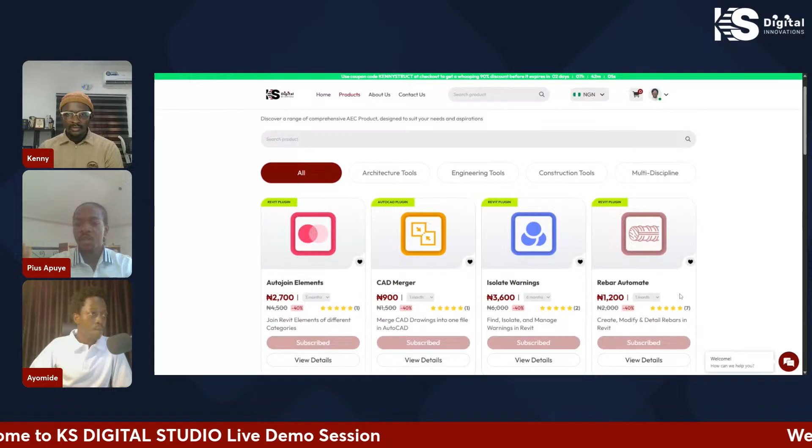Now you can see the 7,200 shows for 6 months. So it's not just subscribe to 6 months. You can change it to biannually, 3 months, 1 month. Let me say you just want to explore the product, so you pay for 1 month. I love that flexibility. Then if I look at the price, I saw that for 6 months, that is 7,200.

On a project that I get, it's going to be less than 5% of the money I can make in 6 months. Far less than 5%, I think. Maybe less than 1%, honestly. It's like biscuit money. So it's one of those things that is going to help me, and I can see the price. It's like you're an artisan and you're getting the right tools to make you better.

So I feel like the prices are, in fact, like I said, if I was on Kenny's team, I'd be like, don't you think we should increase this to like 50,000? Well, I love the prices. Thank you very much.

I must agree as well. I don't want to mention the competitors here, but like what Pius said, the competitors' prices are far higher, and I can understand because they set their prices based on their region. But this is an African-designed product, something that we should really emphasize, and it's been made friendly for all our users. There's been a lot of research in the back, and this is far more affordable.

Imagine you're doing a 4-bedroom structural design and you're collecting maybe 500 or 600,000 naira, and you're just paying this amount. So let's say you're going to be using that for a month, just a 1-month project.

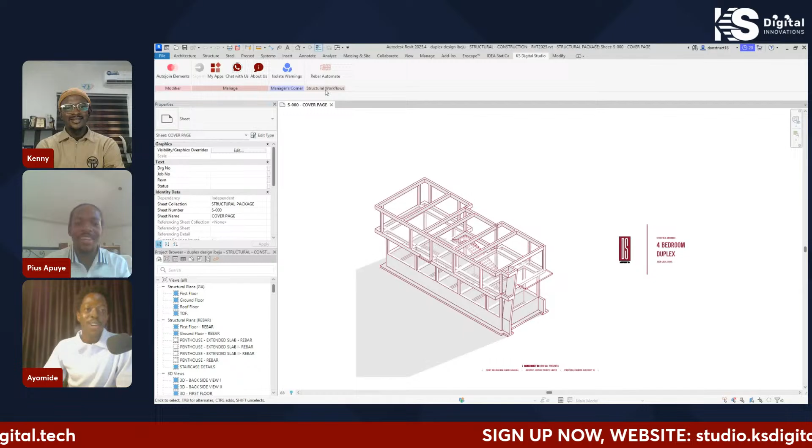So I realized that you can actually rearrange the plugins to how you want to suit them. So under the Manager's Corner, try and click on it and hold it to shift it to another area. Oh wow, that's pretty neat. In fact, let me go ahead and just move the Rebar Automate to the first. Yeah, I like what I'm seeing now. So you can hold your plugins in your own taste. It's an Easter egg I discovered the other day.

I think it comes with Revit. Are you serious? You can arrange how your buttons can be. Yeah, you can check every other Revit tool. It comes with Revit. You see, we learn every day. I'm not going to do that now, but it's something I'm obviously going to do after the stream.

All right. So I'm going to go ahead and open the Rebar Automate tool. So here we have tag rebars, there's rebar visibility, there's modify, and we have the create rebars, which says coming soon. But now let's start from the tag rebars. The first option we can see is hide and tag rebars. If you look at the little icon there on the hide and tag, you see the specific situations where this plugin is most useful: in column elevations, in beam elevation sections, and also for slab detailing. So we're going to test an example using a beam.

So can you open some of your beam projects, your beam view, so that we can test it out? Okay, that's a beam plan or beam elevation? A beam elevation. I like what I'm hearing. Okay, let's see. I'm looking for a beam that we can use for this example. Let me just go ahead and open up, let's say, beam 11. No, this one is too small. Looking for something challenging.

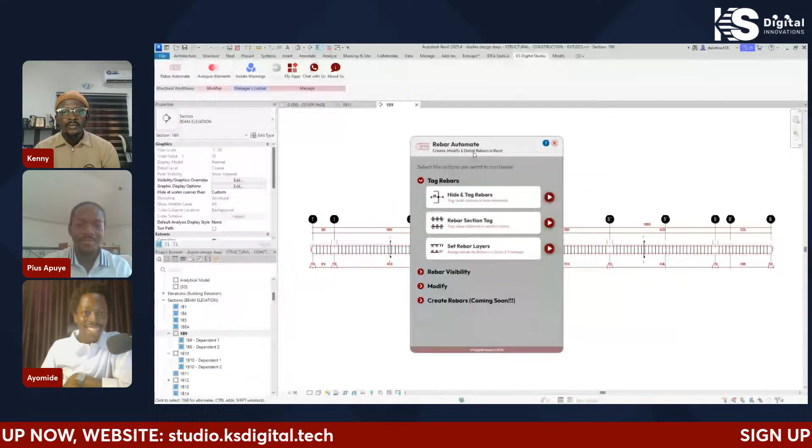Okay, I like this. So we have this in. It's now a very long beam. I think this is okay. Let me see how long is it. Let me go ahead and unspan this because I had to truncate it. Okay, so this is about 19.2 meters in span.

Wow, so what we can do, since we are looking at the hide and tag rebar style of detailing here, you'll see the play option next to the hide and tag rebar. So you click on that button. Now this is what you're greeted with. First you see the option for multi-rebar tag and tag type. The multi-rebar tag is for elements that require multi-rebar tagging, like your links and reinforcements on your slab.

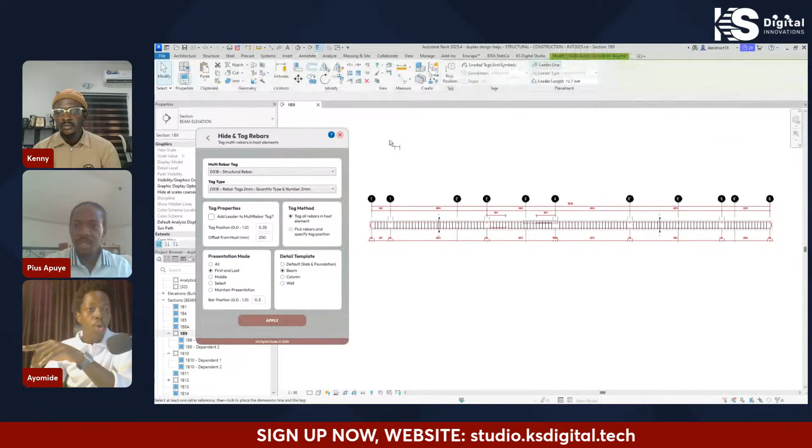Those are multiple, that's where you choose the tag option. You can click on it and choose the normal tag you'd use for links. So that's the same as if I go to annotate and click on the multi-bar here, right? Exactly, see, it's the same options we have here that we have inside there. That's pretty neat.

And for the beams, you use this option next. So what do you use? I use this one here. So the very next one, which says tag type, is...

Oops, sorry about that. I think I had an issue with my Revit. Give me a minute, let me just go ahead and load that up again.

No problem. As I was telling Engineer Kenny while you were out, this plugin literally saved my life this week. I was so anxious trying to finish a project, but I was very calm because I knew I had the KennyStruct Rebar Automate tool that could help me do everything. Is it that deep? I was so confident. When I was testing it before, I said don't worry, this is going to come in clutch for me. I can't wait to show you what has literally almost saved my career this last week. I can't wait to see it as well.

Sorry about that, I had a process going on in the background, so I think that's the reason for the Revit crashing back there. Let me go ahead and do that again.

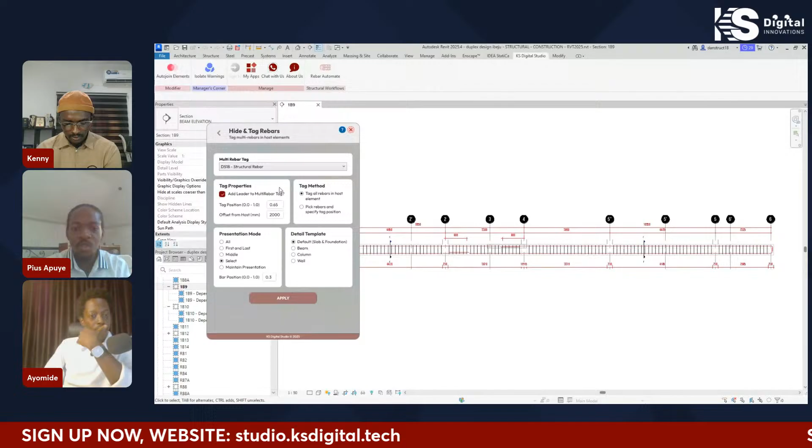Click on the beam because we want to detail a beam. So click on the beam, and here's how that comes up.

So where I stopped was telling you about the tag type. The tag type focuses on the longitudinal bars that are coming - those are your compression and tension bars on the beam. You can see those bars here, the top and the bottom bars. So that's the tag.

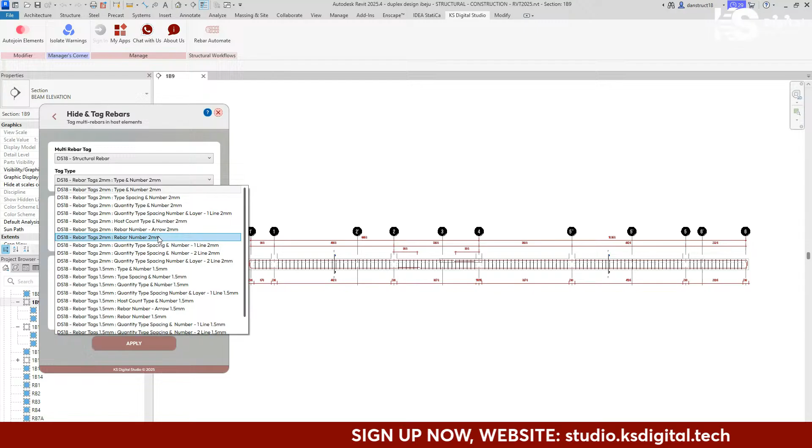So you pick the tag that you normally use. Normally, if you're doing it manually on Revit, you go to the modify and the tag - I think that falls under the annotate tab, tagged by category I believe. I'm so used to using my shortcut that I don't even know - the shortcut TG, right? I created some of mine, but please do pick one that you normally use.

Oh yeah, this is definitely one I'm using because after this stream, I know I'm going to use this. Okay, so let's do that. All right, so what do I do from here?

Various options there. First of all, you see the tag properties, which gives you the option to add leader to the multi-rebar tag. The leader are those little lines, and then you see links detailing the line that's attached to that - when we do it, I'll show you. So you can click that option.

Then secondly, on the right there, we have the tag method. The tag method says you can either tag all rebars in host elements at once, or you can pick specific rebars to tag at once. So let's say you want a more detailed view and want to control it more - that's when you pick that option.

But for now, you notice that it's grayed out because you're not really - yeah, I just noticed that. Yes, so you notice that you're not able to pick it.

But when you're doing it, especially when we get to see how we detail a slab, you see how it comes into play. So now on the bottom left, we have presentation mode, and this is related to the links.

I think it will help show how this works. Yes, we have 'all', which shows everything still there. We have 'first and last', which is the preferred option to display for links. We have the 'middle', which just shows the middle one when you get to select, and then 'maintain presentation' - supposing you've already done it before, it's going to give you that same view that you wanted.

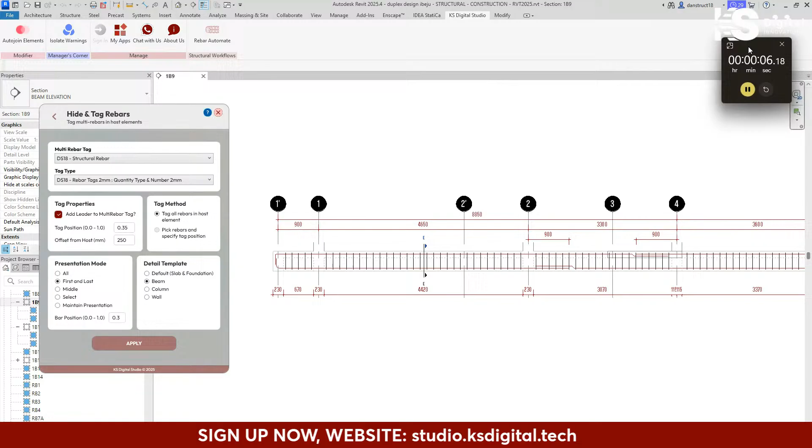Remove that first 10 seconds. Okay, so I'm just going to come here, I'm going to start here. I believe this should be my workflow on a normal day, especially if I'm not about to crash out.

So I just select one, then I type SV to select all the links. I come here, change this to first and last, and insert. All right, and I've already placed all the dimensions here - don't really need to worry about that, so I just go over here.

Let me just close this for now. I'll go over here and I want to tag, so come here to annotate - or let me just use the shortcuts. Okay, so annotate, I come here.

Okay, my fastest version - okay, I'm panicking a bit. All right, so I'm done here, I put this at 7. Okay, I tag this one here, all right, tag this. Okay, there we go.

And probably I want to still tag here at this point a bit, maybe - I don't think there's any need, it's not that long, so this is still the same bar.

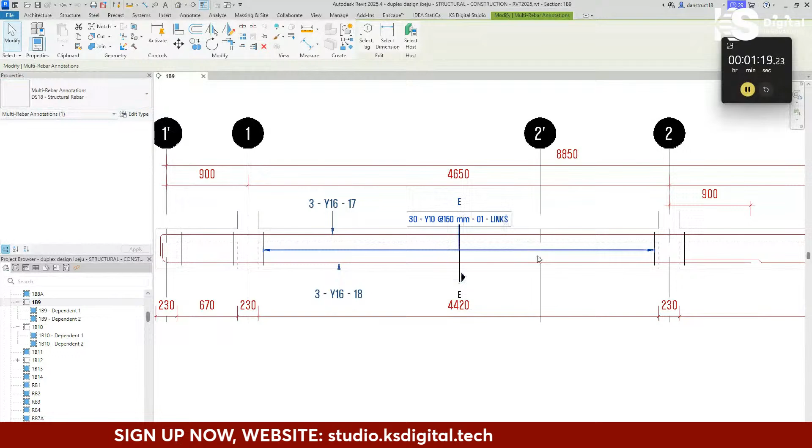Then I want to just go ahead and put the multi-rebar annotation. So let me just come here, tag this - there we go. Oops, all right, oops, not this - I'm just going to change this here to this option here. Okay, all right, great, let me do that again.

Turn off the leader line, I want that centered. Okay, this is giving me a headache. So this little one here, let me select the tag and turn off the leader. This was a mistake, let me center it. I'll type CS, then this one here, MT again.

I'll turn on the leader line because this span is a bit too small. Then I just want to place one. There we go.

So that's 2 minutes on the dot, right? Yes, this is 2 minutes. On a normal day it would be faster. Just to give you background, this engineer is very well experienced with Revit, he actually has courses on Revit, so this is fast for a normal person. It's faster than average and it takes 2 minutes. So there's a difference between telling you it's going to save 80% of your time using this tool.

But now let's show them using the plugin. Let's see how much time it takes.

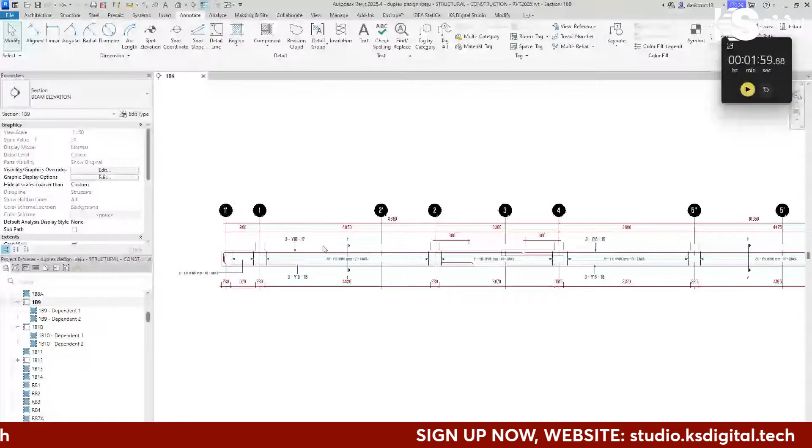Does that mean I have to remove all this? Yes, move everything, go back to your original presentation. Control C, okay. Let me quickly remove that. Or you can just simply undo, use the undo button. That makes it faster. No, you already put the first and last, but okay, no problem. The links, all of them are showing. Okay, I could just quickly change everything back to the normal presentation. Exactly, okay great, yeah that's right. I should have just on.

So I go ahead and do what now? Yes, okay, now please start the timer first. You see the timer on the screen, click on it. Okay, yeah. So when you set everything, you click on apply at the bottom. Apply. So you would see it select beam host, it selects the beam. Okay, the physical elements, right? Yes.

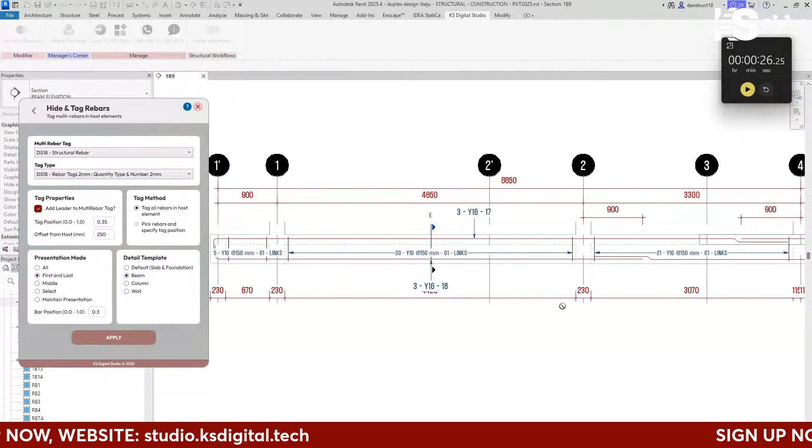That's okay, wait, hold on. I was explaining, so that's going to take some time. Let's say approximately 10 seconds, if you already know the whole process. Because I'm showing him this for the first time, so I have to explain. But imagine you're using this, so this is about 15 seconds versus 2 minutes. That doesn't matter at this scale, but imagine you're trying to detail up to 56 beams.

You mean what I just did now? Yeah, I knew it was fast. Okay, this is interesting, yes it's mind blowing, right? Exactly, so it's a different case where I tell you it saves 80% of the time, now you're seeing the best of the best doing it under 2 minutes. It might take you even longer, and then see how much time.

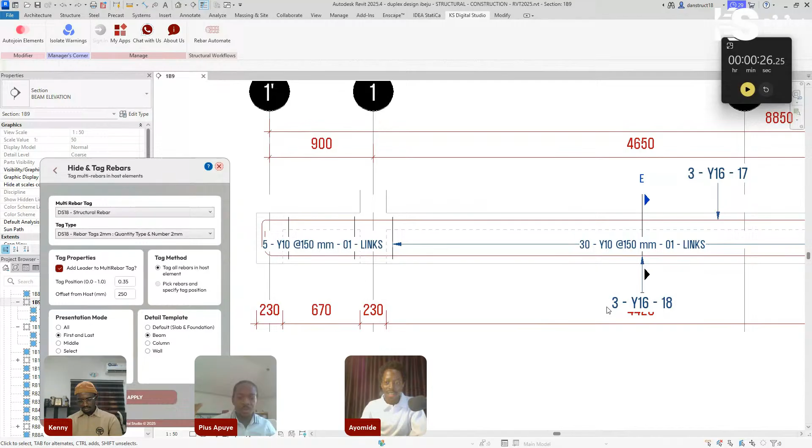That is 15 seconds. When you put it, wait, all of these are tags? Wow, yes, wow. Wait, hold on, let me try something here. Wow, wow, even though they are actually tagged. So even while using this, imagine you're doing it on a large project where you have like over 50 beams. 2 minutes versus 15 seconds will not matter to you now, but when you put compounding figures, that's when you know you save time.

So the only little adjustment we had to do here was the last one, I just did that. Yeah, that saves a lot of time. Actually, yes, oh my god, I wish I could pay for this again.

I'll be very honest, right? I used Kennystructs before this came out, the Rebar Automate, and it worked very fast. Well, this year with the whole redesign, it just makes everything like as if you are using a Dynamo script, especially for those of us used to using Dynamo. That's the idea.

Wait, this was okay, let's cut that, the time it took me to understand. So this was about 30 seconds, remove 5 seconds, like ah okay.

You know what, let's try something here. I do hope the stream doesn't time out. Let me see, I think I have some. Okay, no foundation beams, let me use some suspended beams here. Oh my god!

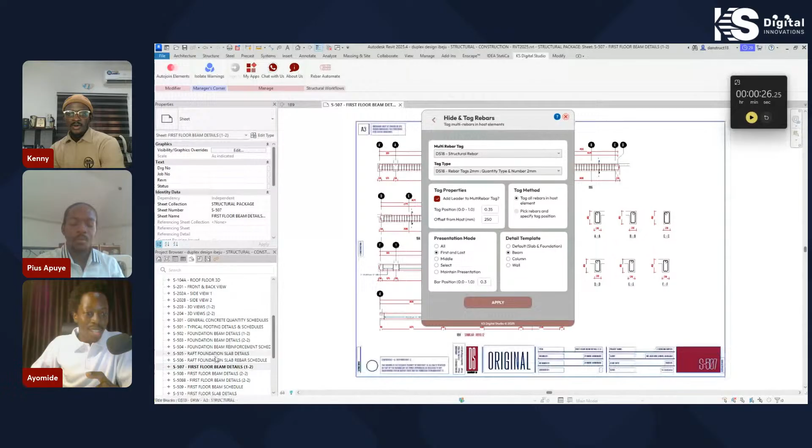These are the kind of tools that you use. I hope you're going to try. I think you should also try this slab. I think that will also blow your mind. I hope you're going to do the slab, right? Yes. Okay, I'm going to try it in this slab. I'm going to stream this now. Yeah, I want to try it here.

So I have this view here, right? I have the tags. I just want to quickly do this. So these are already placed on sheet. So you mean I just have to activate the sheet here? Just come and click on apply, click on the beam, right? Okay. Yes. Wow. So you mean for truncated beams, it carries over to the next.

Oh, God, take my money. Take my money. Are you serious? Because wow. Yes. So it happens here. Oh, this is neat. Exactly. So I can just come back here, click on apply, do the same thing here. Wow. So it's just a matter of, in case some things are clashing, you just modify. Yes. Exactly.

Sorry, Ijidayo, I noticed something on the first beam. The first beam that you did, yes. So you can see that you actually did it, but we have to investigate why it did not work. Like you can see the rebars at this side, it tagged the links, it tagged the other side, but let's also figure out why it did not work.

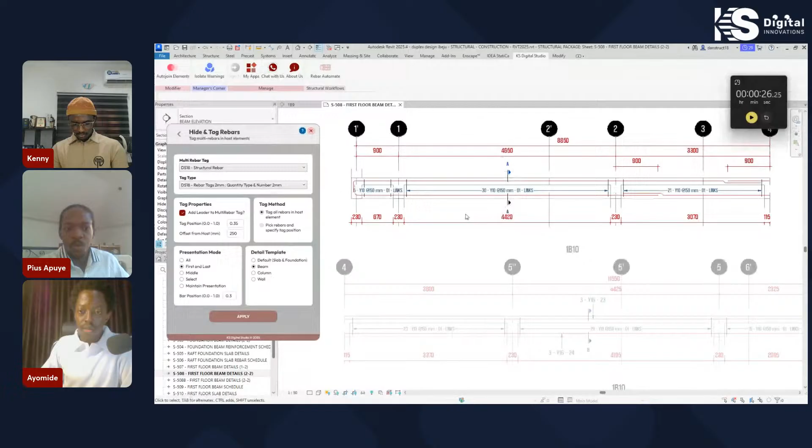Okay, I think I know why this is here. I think it's probably the way I set up the view. So let me try and click on apply again and try to do this. I think it's the way I set up the view because sometimes the annotation crop tends to remove it or place it out of the view. So I could just easily do this manually. It doesn't take me too much time, but I think it's the way I set it up actually.

Let me just go ahead and set this line. Sorry, I'm not detailing. I almost got carried away. Oh wow. You mean I'm done? I'm just done with this beam elevation. So in less than... okay. I think I'm getting too excited. Let's carry on.

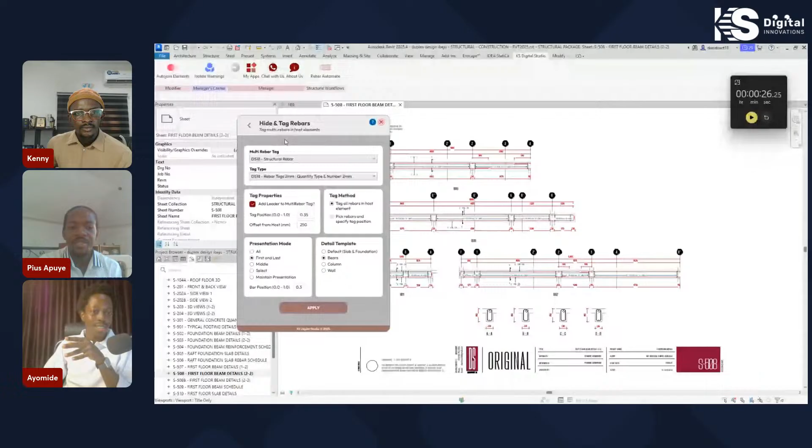Okay, so these are for beams, right? What else can you use hide and tag rebars for? I think you said you can use it for slabs. Yes, slabs, and also slab foundation rebars, like on raft foundations that are literally slabs. So let's try that. Okay, so I have this here. I think I set up some tags initially. So I've already done the presentation here. I was just tagging some of them in place.

Okay, so you mean this same tool we can use as well for slab rebars, right? Yes. So I'm guessing I change this here to default slab foundation, right? Yes. So you can now see, first thing is that the tag type that you noticed on the beam is no longer there, because for slab detailing on Revit, the best way is going to be the multi-rebar tag. That's why the tag type disappears.

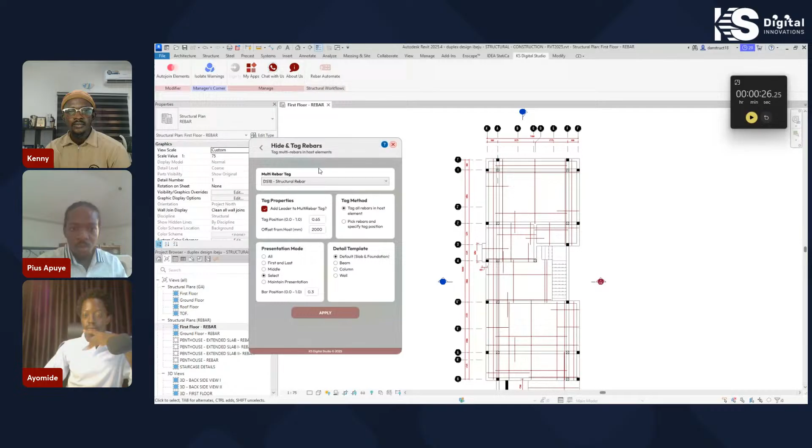Then you can also see tag properties. You can add leader to multi-rebar tag, which is very important for slab detailing. Then you can also pick the position there and adjust it. Then, very important, the tag method. Last time that we looked at it, the pick rebars and specify tag position was not available because it was a beam elevation view. But now you can see it's available. But let's see tag all rebars in host first, then we'll see how the second option works.

So under presentation mode, for this case scenario that you've already chosen the rebars and presented them, you can now use the option maintain presentation. Okay. Yes, on presentation mode. Then on detail templates, since we are detailing a slab, we choose the default, which is slab and foundation.

So click on that and make sure that the multi-rebar tag that you're using is the one you intend to use. So is your DS18 structural the multi-rebar, okay. Here. Yes. I think for slabs I use this then. All right. Okay, thank you. Okay. So you click on apply. Okay. So it prompts you to now select the slab, right?

I think I saw it. Okay. I also noticed as well, it shows you on the status bar at the bottom here, which is quite neat, just like how most Revit tools work. Okay. Yes. All right. So at the bottom then. Okay, so I just click on. Okay.

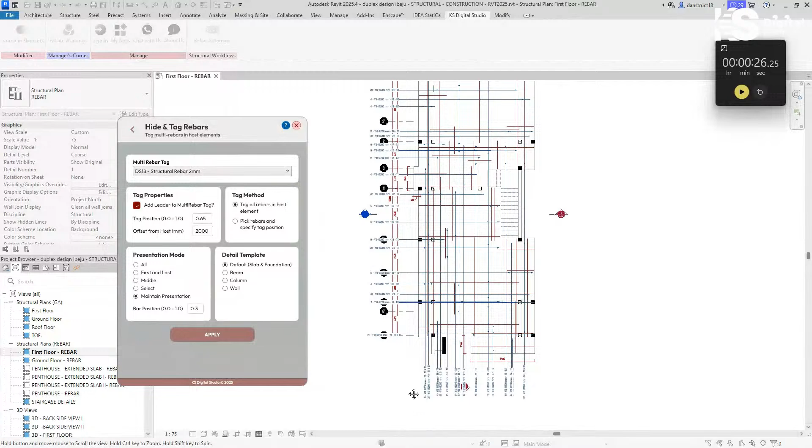Wow. So first of all, I don't even want us to test detailing on slab like this, because if we are going to see this 56 minutes, it's going to be another 56 minutes. Yeah. So, no, this is wow. Okay. Yeah, this is nice. But I think this automatically details to the left and to the right.

So if I wanted to, you can see these are where my dimensions are. So let me try and do something here. I'll just select the tags and I can just move them here to the side, right? I think that should be okay. Yeah, that works. Okay, this is interesting. And it didn't change my presentation, did it? No, it didn't. Okay, so if those ones are clashing, I can just easily move them. I'm done. I'm actually done.

But that laugh sounds so evil. Okay. So it's just, yes.

Okay. So now, because I noticed that you had to manually adjust it to the right side, that's where the second tag method comes into play. So I want you to undo everything and let's see how the tag method works for the second one. Let me just, I think I did a lot. So what am I doing here? Am I changing presentation mode? Okay, so you're still maintaining presentation because you still want this presentation. The only thing I want to change here is the pick rebar and specified tag position. That's under tag method. Okay, yeah, all right.

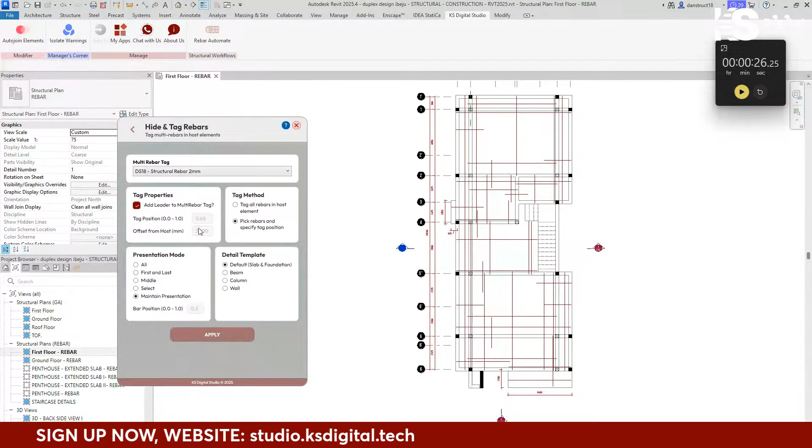I see these options are now grayed out here. Yes, exactly. So you click on apply. And then it prompts you to now select the rebars. So if you see on the right, that status bar will show you select rebars. Okay, so you're not selecting the slab now, you're selecting the rebars. Yes. So let's try that. So select specific rebars you'd like to tag. Okay, I can select multiple rebars at the same time, right? Yes. So this one is more precise.

So just select some of the rebars. And then you can drag and select. Yeah, that's true. You can actually do that too. Oh yeah, I can make a selection. Okay, but I think I'm familiar with this. If I click on that, it will remove the current selection. So I think one has to be careful with that. Okay, I think I can hold down control. I forgot it's Revit. Okay. So I just click on finish, right?

Will it just tag? No, what it does is prompt you for the direction you want to place those particular rebars at. So you can see that line. Okay. So you mean that it won't go automatically to the left and the bottom now? So if I want to do it to the right, like this. Yes. So you just pick it outside and click. Okay, set desired tag location. I think I'm seeing that. Yes. So now it does display.

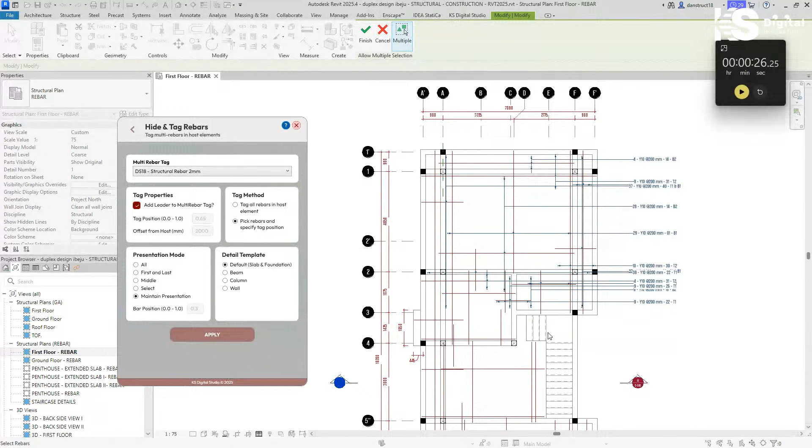Okay. Exactly. So I think I know where this can be useful. Do I need to click finish? Yeah, I don't think you need to. You can just continue that way till you finish tagging. Okay, yeah, so I can just make another selection like this.

Wait, what do you call it? Our private audience, are they here? Are they seeing what I'm seeing? Because I feel like they have some comments here. Wow. You know, hold on. I want to use this stream to do some of my projects.

So when I'm done, I just click on cancel, right? Yes. Cancel. Okay.

Hold on. I have a project like that. Give me a minute, I feel this is going to be very useful, especially where you have complex slab systems. Let me try to open it up. Is our private audience there? I just want to get a feel. I can't be the only one being surprised by all of this right now. Wow. Okay. Let me try and open up one here.

This is interesting. Let's say for this particular slab that we're seeing right now, it would take me probably an hour plus. Let's be honest, maybe an hour, 10 minutes, right? To actually complete the tagging, trying to align everything. It is not something I enjoy doing. Okay, let me go ahead.

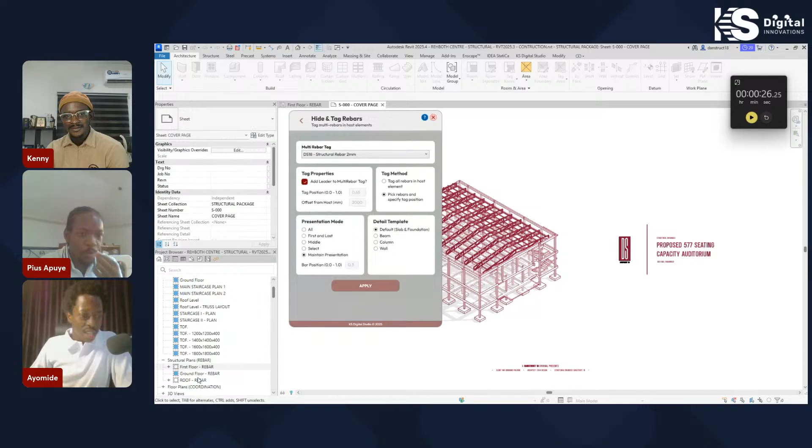So a good rule of thumb that I discovered while I was doing this is before you start, in case you're using the pick rebar and specified tag position, if you want to be more precise so that you don't miss any of the rebars since you're using this tool, what I do as a structural engineer is I do panel by panel. So take it panel by panel so you do not miss any detail. Oh, I see.

So another trick to add to what you just said: once you are done panel by panel, in case you feel like you might have missed something, you can just select the entire rebars and tag. It only picks the ones that are not tagged. Okay, exactly. Let me see.

Yeah, because you can see there's a void inside here. Yes, this is what I want. So that means the ones on the side here, I can just come here and make a selection over them like this, right? That's correct. And then I click on finish. You don't need to click on apply multiple times. Just keep repeating until you are done. Oh, nice. So I can just come here.

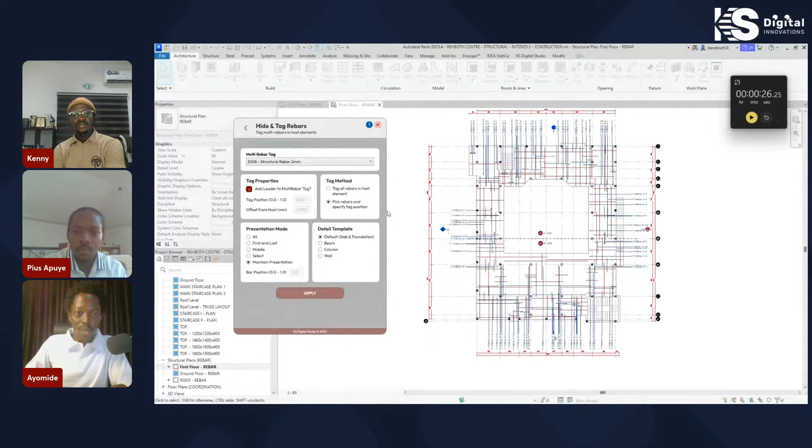Okay, awesome. So if I missed any, I can just use this option. I just make a selection over everything, right? Yes. And then I click on finish. I think you click on apply this time. Okay. Hold on.

Your option for the pick rebars was still turned on. That's why that happened. Oh, okay. You did an undo. Yes. Select everything, all of them. Okay, so the ones that were not tagged are now tagged. So everything now is covered.

So now it's just to adjust the tags. I think from Revit 2024, there's an option where you can just select the tag and then you can align them to a specific position. Then you have this option here to select the tag, align tag, then you can align them to the left or to the right. Oh, that works. That was pretty neat. Awesome.

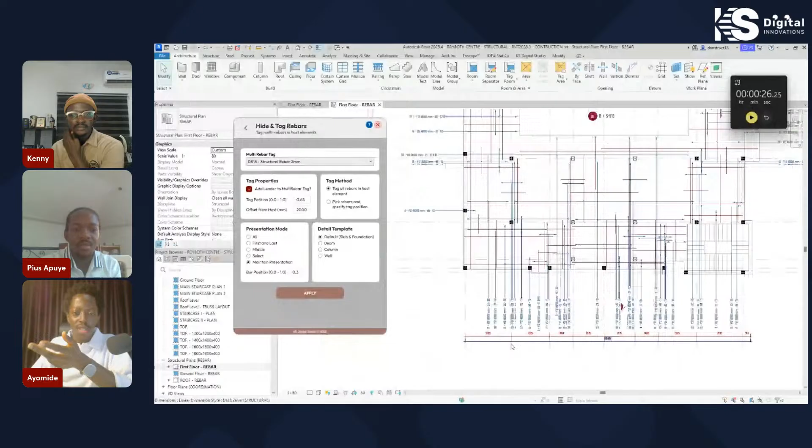So this is just going to take you spacing them out. It's going to take you everything under like 5 minutes max. This thing was going to take you an hour. From one hour to 5 minutes, I promise you. That's how many percent time saving? Almost 90%. These are the kind of projects where you tell the clients give me a week, right? And then you finish in 2 days and just go and relax, party.

Actually, I see. Yes, wow. Thank you, this is not an exaggeration. Okay, so let's also move on.

Let's check the second tool there. But I wanted to show you something that some of the users might encounter, which is related to your rebars not being in the particular host. So I wanted to show you through a beam view. The first thing you might encounter if you don't see a tag is the so-called annotation crop view. If it's outside the annotation crop view, the tag is not going to show. The second thing I noticed is that if the rebar is not specified to that host, that's when you see it.

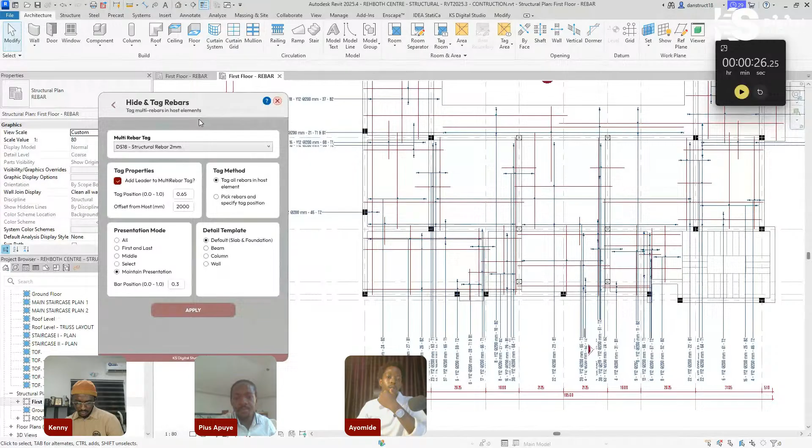Okay, that makes sense. Let me try, I think I can do that here. Let me just go ahead, because I have not finished this, I'm certain I should have some. So I wanted to show them this because it's very important when rebars are placed outside the host, right? I'm looking for a beam we can use. All right, let's use this beam here then.

So we have a comment here, very funny comment. If this tool includes a function to automatically create the bending schedules, I will name my children after the founders. Very funny. Looks like you're going to name them very soon. I think you just have to start picking.

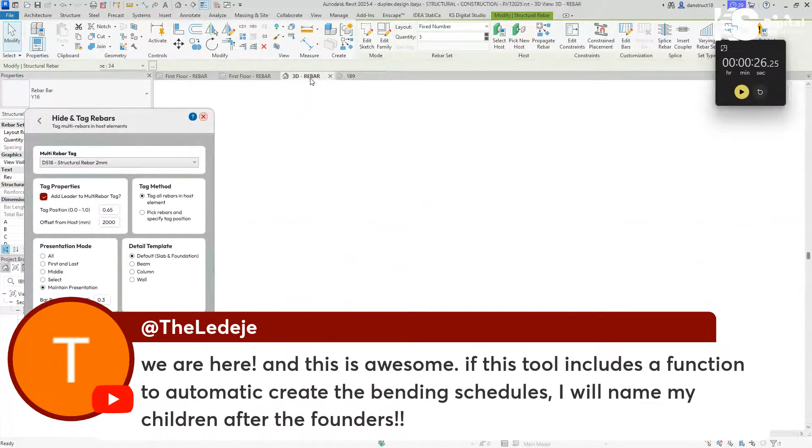Maybe you just have to reach out to us and get our names, because we are going to be launching this very soon. We have a tool that does bending schedules, and schedules for rebars, concrete, and formwork, all in one tool. It's coming out very soon, so please get yourself ready.

Lady J, I don't know how to pronounce your name, but you can see your comment on the screen. Thank you very much. All right.

So I wanted to also show them. I have this particular rebar here, right? It's meant to be hosted in this beam, and these are some issues you normally encounter during modeling in Revit. It is meant to be in this beam, but if I click on select host, you can see it's inside this column. So let me try that again. I change it to beam template. I also notice it keeps your previous settings. That's nice, I don't have to always go back here.

So let me try this. I can click apply again. It won't remove or add extra ones to the ones that are already tagged, right? Exactly, which is so good about the tool. So click on it again. Okay, I see what you're saying. It's not tagging this rebar here. Yes, that's an issue you can encounter. So let me now put it back inside here. All right, if I click on apply now, oh, I see.

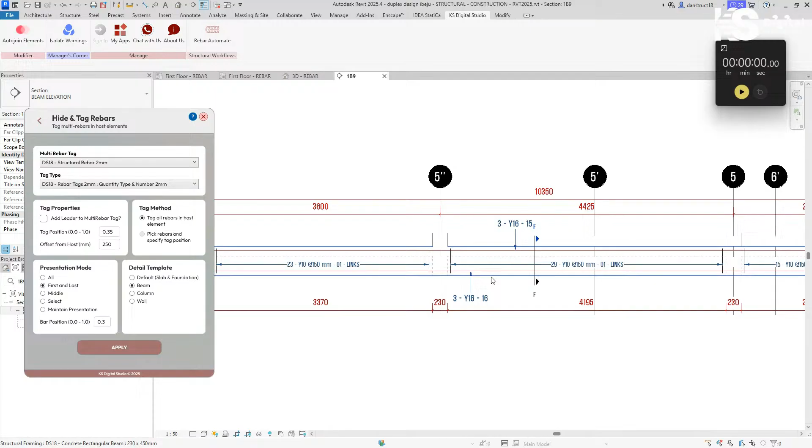So two things to note. The rebar has to be hosted inside the elements that you are selecting for it to work. Oh, I see. Interesting. So in case you're using the plugin and you encounter that issue, the first two things you should check: is your annotation crop view too small so that your tags cannot show? And secondly, confirm whether the rebar you're modeling is placed inside the host. It's also good modeling practice that if a rebar is inside a beam, the host shows the beam, not the column as we saw.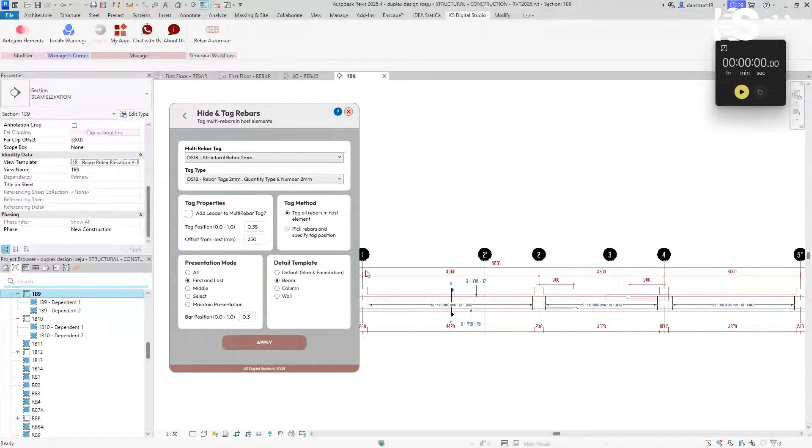And the second thing I wanted to note, you notice that it doesn't disturb the other tags you've already done. Let me see to the right of the beam. Yes, you can see you made your little change there. You anchored your last multi-rebar tag to the left, so it doesn't change it, which is very good. So you're not scared that it's double tagging, even for your slab rebars, and you have to go cross-checking. Something our users can also see. Great. I believe anybody that uses Revit day in, day out would appreciate these small and thoughtful details.

So I'm thinking right now, do we have something for this? I would like to say this is one of my worst things to do within Revit, and that is doing rebar section details. I don't know if anybody can relate with me doing rebar section details. We all can relate. Now let's go back, because for this project, since the majority of the beams are similar, I have about 24 to 26 in total. But for some projects you can have up to 100, 250. It's not anything to smile about.

So do I use the same tool here? No. Like we said, I want to go back to the main option. You see the arrow in front of the hide and tag rebars on the plugin, at the top. The arrow takes you back to the main menu here. So for this view now, you can see rebar section tags. That's what we're going to use, and you can see from the little icon that this is the template that's going to be required for sections of beams.

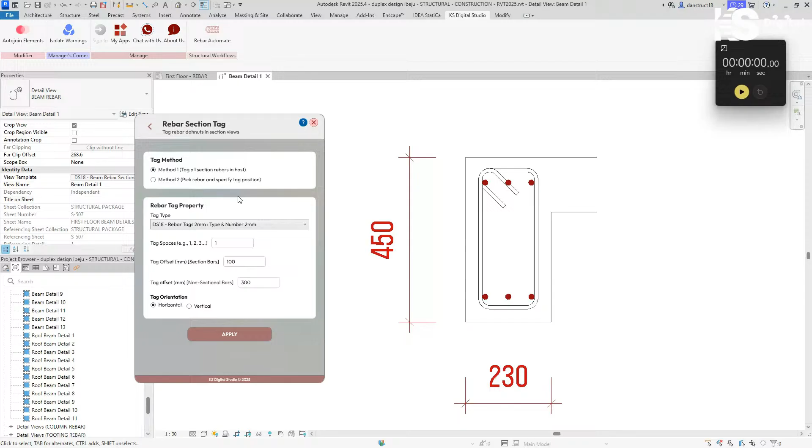The next thing you can see is the rebar tag property. Same thing, you're greeted with tag type. So you choose the tag type you normally use for your section beams. Let me quickly check something. For this longitudinal rebar here, I think the rebar number is 07. I like to show rebar numbers in sections so they can always reference it in the bending schedules. I like this as well. It shows you the family and the types, because I can have multiple families with the same type name. So this is very descriptive. I want to just use rebar 1.5. This should work here.

So when we see tag spaces, when we go to the slab section it's going to explain better. But for now, you leave it at one. What it normally does is skip the rebar next to it. If you say one, it's not going to skip any. But if you say two, it will skip the rebar next to it, then tag the other one. Seeing is better than explaining this thing. When we go to the slab section, that will be more descriptive.

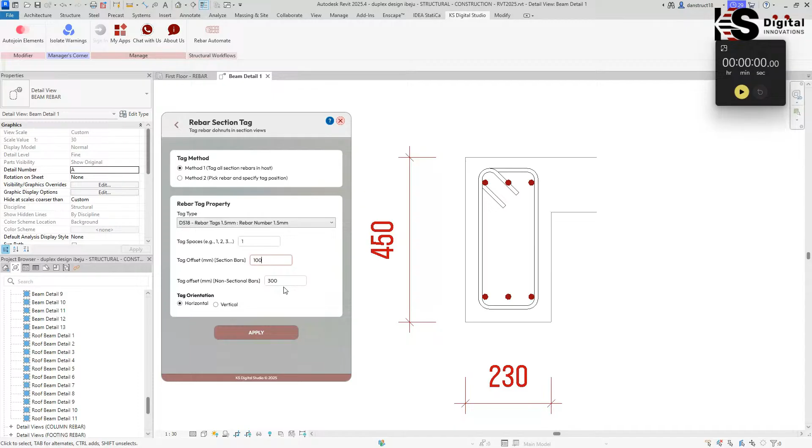Then the tag offset for section bars: you can adjust the length for the section bars, and then there's also the tag offset for the non-section bars. The tag orientation we're going to use here is horizontal because of our view. And once you're done with all your settings, you click on apply.

Okay, so let me understand. This tag offset for section bars, I'm assuming it's for these bars that are cutting through the section, right? Yes. Then the non-sectional ones are for these ones like this, in plain, right? Yes. Okay, I see. So tag orientation horizontal. I think I understand this. So I just click on apply, right? Okay, select rebar host. I see the status here. Wow. Okay.

That was fast, hear what I just did. I do hope we're not spending so much time, because I want to show you how I would ideally do it in real life.

So I'll just come here, select, then change it to the type I want. Try it as if this is the first time I'm doing it. Then I just select it, come here again, and copy quickly. This is why I hate this.

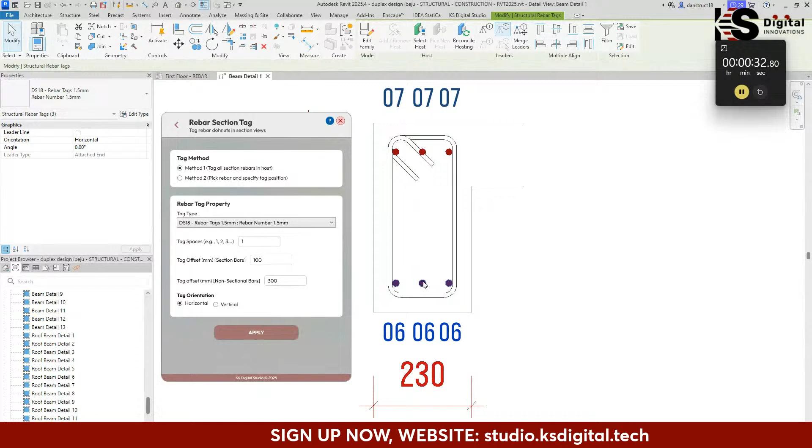It's a strong word, but I know the reason why. If you are lucky, you can sometimes mirror it to the bottom and hope it took that tag. Ah, God, I don't like this at all. Okay, this is 06, so it got it right. So then I come here, okay, let me just quickly try this. That took me exactly 32 seconds. If I'm in the mood, I can be breaking records, like 20 seconds or so. Let's see now.

I want to compare how much time it took with the plugin. I suggest you also use the tag offset for the sectional bars, maybe 50, usually based on the view scale, but let's change it to 50.

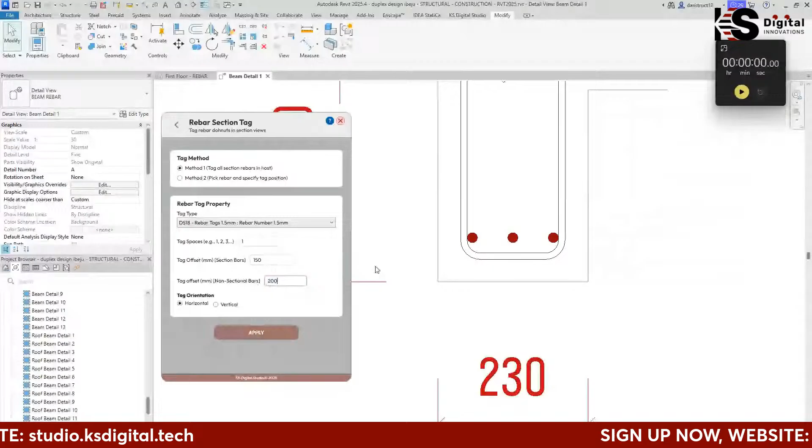Okay, let me bring in the reference cards with it. So you mean the distance like this, right? From the... okay, so let's say I would use about 150 for the offset from the hosts. Let me try this, no, 200. Make it 50. It's the offset from the hosts, not from the bar.

That's from the beam. Okay, from the beam. Oh okay, I see, okay. 50, then let me say...

Let me just demonstrate. So that's the distance from this point here, right? Correct, and then the same distance as well. These small details are very important, right for us detailers, since we want to have this consistent look in the project.

All right, let me try that again. Oh, I see, I see, so it reduces the gap and space. Okay, let me just do that again. Let me just try maybe 20. Okay, so it gets it closer.

Oh I see, so it's also dependent on scale, just like you mentioned. So 50 works, I use 1 to 30. Okay, I see, yeah, this works nice, this works nice. Okay, awesome, awesome, awesome.

So this is for beams, right? Let's try it for slab, let's see how it looks. I think yes, for slabs, right?

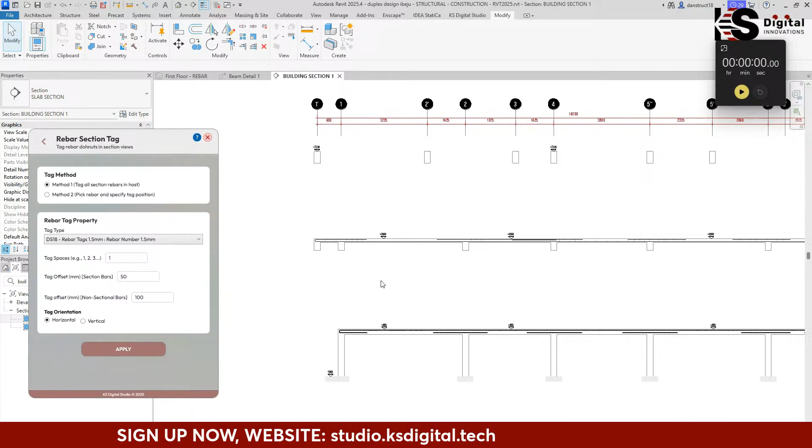Superb. Okay, I think I called it building section 1. Have I done it? This is one I used to purposely not put a section for some of the buildings, the plans I've done. I'm serious, just to be annoying. It's frustrating, it starts very frustrating. It's very frustrating, honestly.

Okay, so is it the same procedure? Do I have to change this to another tool, or is it the same tool I use? Okay, since it's the same icon, it's the same way you want to tag, which is the template you always see when you open the Rebar Automate tool. It's great.

We're going to still stick with the rebar section tag. Okay, so I'm still here, I leave everything as default and just click on apply. Let me try vertical and see what happens. So I just select, okay, so it works for beams and it works for slabs.

Okay, let me try this. Okay, so if it's vertical, that's this direction. Yes, okay, let me just change it back to horizontal. I don't think, maybe if I'm detailing walls, I may want to use vertical.

Awesome, wait hold on. So now, because in this case, you can see the spacing, so just adjust this more. Yeah, the scale is smaller here, that's why. Yes, okay, yeah, this is perfect, this is perfect.

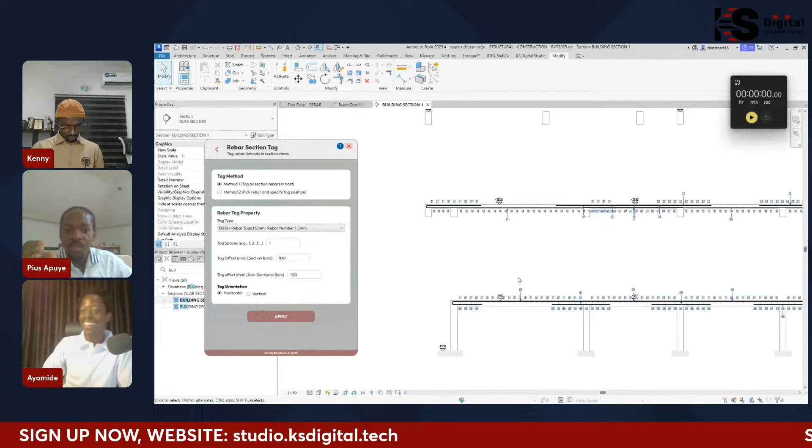So now this is where I can talk about the tag spacing, because you don't want to really tag all the rebars individually like this. What you can do is use the tag spacing, and it will skip some number of bars, then go to the next one.

So let's try the tag spacing as 3. Under the tag spacing, okay, tag space, okay, here. Yes, okay, I understand it now. I understand what you mean. Okay, so apply. So you can see it is exactly one, I mean 1, 2, 3, right? Okay, yes, 1, 2, 3.

So every three bars, yes, every tag, every three bars. If you've done this presentation before, you'll know how important this scene is. I'm serious. It's only if you've suffered this scene that you know how important this scene is. I'm not even joking.

These are paint engineers talking. Wow, so you mean I can, this is actually okay, so I can come here to this second building section. I can just do the same thing here. It's just a matter of a few technicalities. Oh, okay, this is interesting.

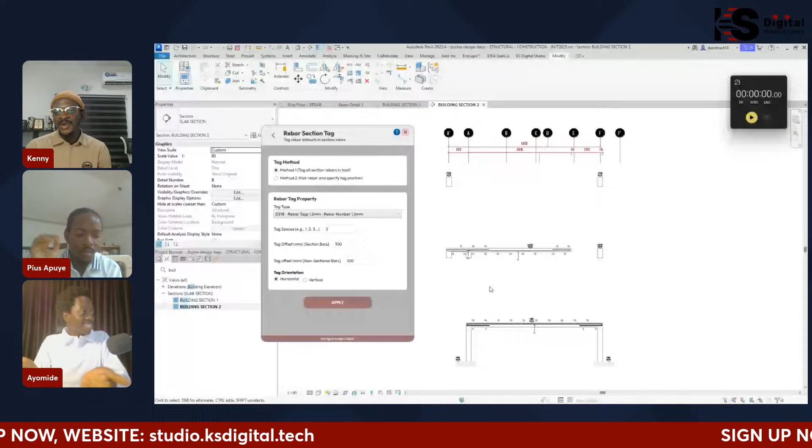Nasri made a comment here. He said it's so fast. Nasri made a comment here in the background. Nasri, do you want to say something? You're on stage, you want to say something about what you are seeing now? I think Nasri made a comment in the chat. Nasri made a comment, he said it's so fast, Nyayo is forgetting to time it.

I want to finish the stream and just complete this project. That's exactly what is on my mind right now. I'm done, I'm done, I'm basically done with two sections. Nobody can really understand the joy that is actually in my heart right now. Wow, this is interesting. So lastly, I just want to show you the

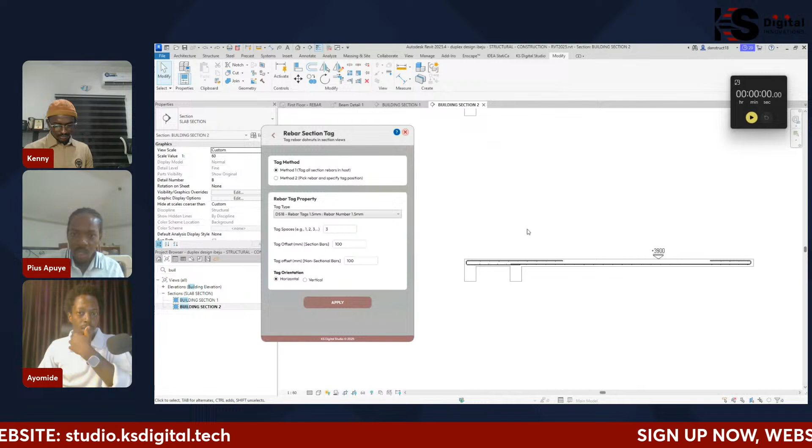method two, which is pick rebar, specify tag. So like I said, the KS Digital Innovations are very specific about you having control of your detailing. So for method two, which is your pick rebar and specify tag position, it allows you to actually pick specific bars and then specify their position. So click it, as the name says actually.

So pick method two, this one, right? Okay, yes, so you click on apply. So it tells you, it prompts you to select a rebar. So you just select it, it's rebar now. Okay, what do I do? So you selected rebar, so you can drag it up. You should select your desired tag location. Okay, so you can now lift it higher and still applying that tag spacing that you chose. So if you want more specific rates, that's what you can do.

I think I know where this can be useful. You know where we have, for instance, those slabs that are not on the same level, right? Probably one is at, you can see right now this is at 3900. So let's say, and I have different annotations. Let me just try and do something like this. And I want to have more control over where my tags are, right? Let's say I want my tag to be directly above this.

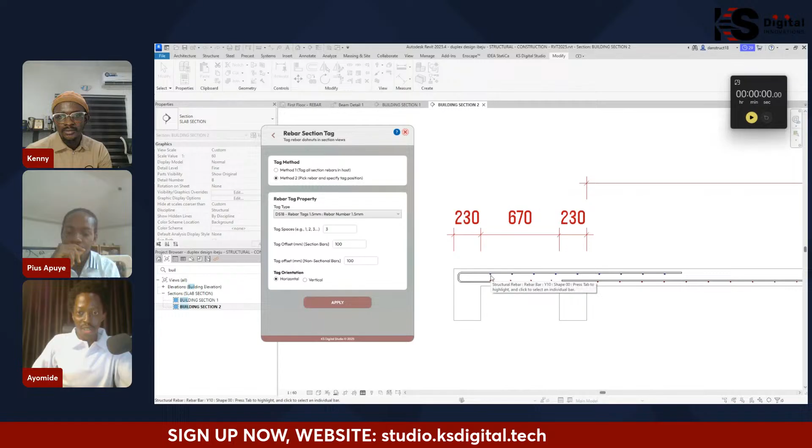So I can just come here, for instance, let me just try, I'm just exaggerating, I'm just trying to see. Okay, I place this one here, then I come here, then let's say this one's here. Okay, all right, this makes sense. And you can continue, I think. Yes, you can continue. And okay, it works for non-sectional as well.

Yeah, look, for non-section as well. Okay, so if there are any obstructions, for instance, let's say if I did the elevations that is showing a beam here below, and I want it to be spaced, and I don't really know the value, I don't want to be playing around.

Nice, I understand it now. I understand it, so I don't have to be selecting them one by one and then just pushing them up or down. I can just do that at once. Okay, yeah, exactly. Interesting, this is interesting. I think I love this first method because most of the times they will obviously be on the same plane. So wow, just look at this, it's done, I'm done.

Stephen wrote never again in the comment. Stephen wrote something in the chat, and I would like him to say it by himself.

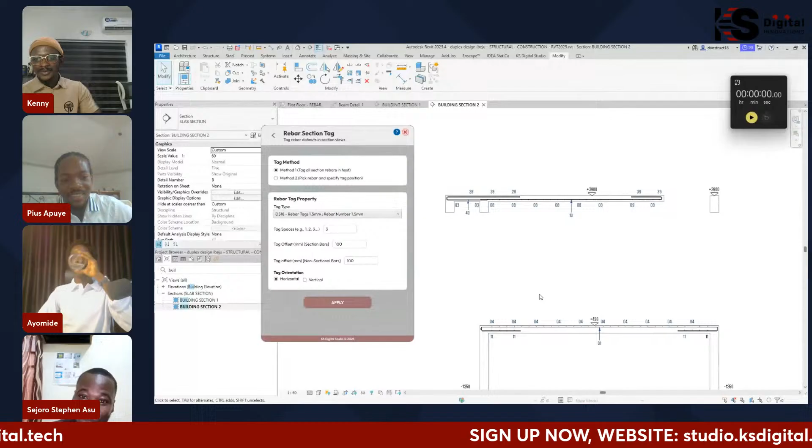Honestly, I'm already carried away by this whole presentation. I remember during my internship last year, I used to run away from detailing projects like this. But seeing how this works now, I think I used the first version of Kenny Instruct, but it has really improved. It's encouraging for newbies and beginners, so friendly and it shows so much. I'm really happy seeing all of this.

I think I have a few questions. The first one is about visuals - like Kenny Instruct and Construct, your color template and all, they are kind of very similar. I'm wondering if it will affect my detailing, since maybe I want to change my own detailing when I use the plugins.

I don't know, what do you think? Did that answer it? I think I understand what he's saying. Please answer really.

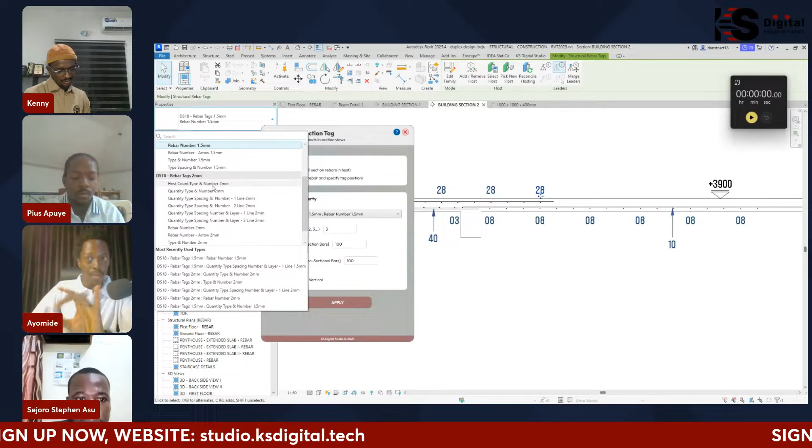So I think you mean, for instance, if I select this tag type, right? We see these are the ones under it. These are just specific to the project I'm using - you see all these options.

If you open a different project, like say you're working with a different company, let me try and use Arop for instance, and they have their tags labeled as Arop rebar tag, you're going to be seeing Arop rebar tag there. So that means you need to know the tags that you want to use before selecting them here - it doesn't have to be the ones you're seeing right now. I believe that's the question, right?

Oh wow, this is good, we have a comment from YouTube - another transition. It's a great testimony that someone wants to move from AutoCAD to Revit. This is what the industry has been shouting about, right?

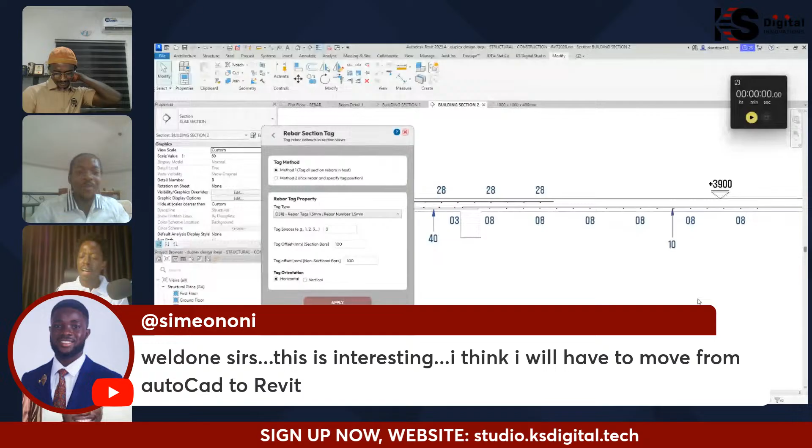What do you think, Ayo? I think you're also giving some people a run for their money because a lot of people are going to now be specifically using Revit. This is great because the beef with Revit detailing has always been that it takes so much time. Now we're doing it at the same time - we're getting closer to doing it at the same speed.

What I love about detailing with Revit and doing my models in Revit is that it's a BIM software. So you can have things like someone mentioned - I want to create schedules from it, I can name my children after the founders. We can create schedules, this is very important in Revit. You can also use the 3D models, it's visually appealing. You can use the information for your QS to do form works, a lot of things.

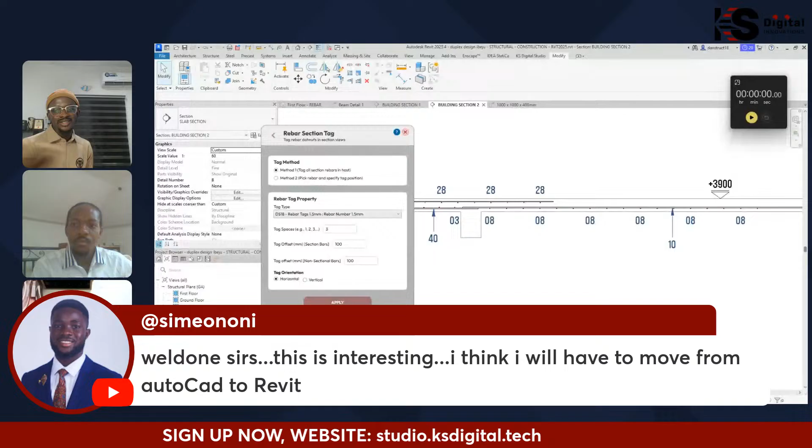Thank you very much, Pius. I'm Stephen, we are really happy that you're going back to detailing because of this. Yes, it's fulfillment for us, to see people willing to do their work. There was a time I wanted to make a video about why people start hating their work, disliking it because of how tedious, repetitive and strenuous it is. But tools like this help you cut down on the time spent on your work, and then you enjoy it. If you're spending 2 hours on just small tasks like this, spending less than 5 minutes on an entire project is remarkable. I'm very happy about the feedback.

So is Ayo still here? I think, okay, you just joined us now. Okay.

Okay, I'm back. All right. Hey guys, so sorry. I think I had the transition between my routers again. Okay. Yes. All right. Hope I didn't miss much. No, you didn't.

So we have like two other tools to quickly run through. Pius, how do you want to do it? Okay, so for the other tools, I believe that KS Digital Innovations have also covered more on how to use the other tools. You can check out the YouTube channel, Engineer Kenny, on most of the various tools. Yeah, on the website too. When you click on view details on the website, there's a screen there with a video. So you can watch our tutorials as well there.

It's a very simple interface. You can navigate it yourself. So this explains it in more detail. This one just gives you a live reaction. And then lastly it says coming soon: Create rebars. That is the last infinity stone. If you're not using Revit, I think you're wasting your time, and this brings us the Infinity Stones.

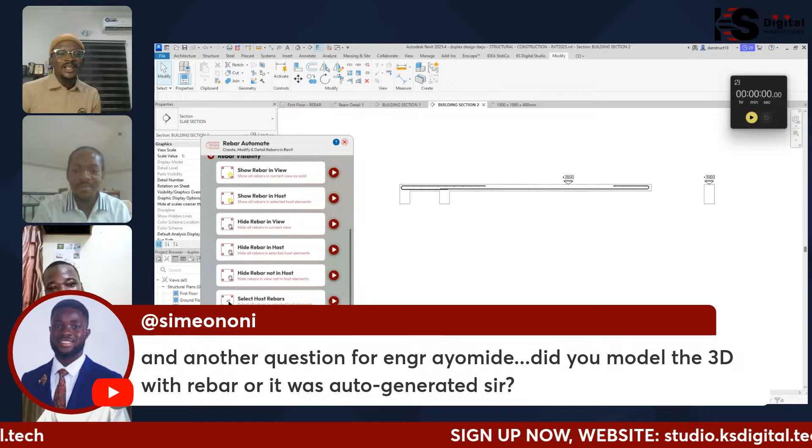That brings us to this question that Simeon Oni brought up on YouTube, another question for Engineer Ayomide: did you model the 3D with rebar or was it auto-generated sir? Okay, let me just go ahead and open it. Yeah, so all these were modeled within Revit. They were modeled before this session.

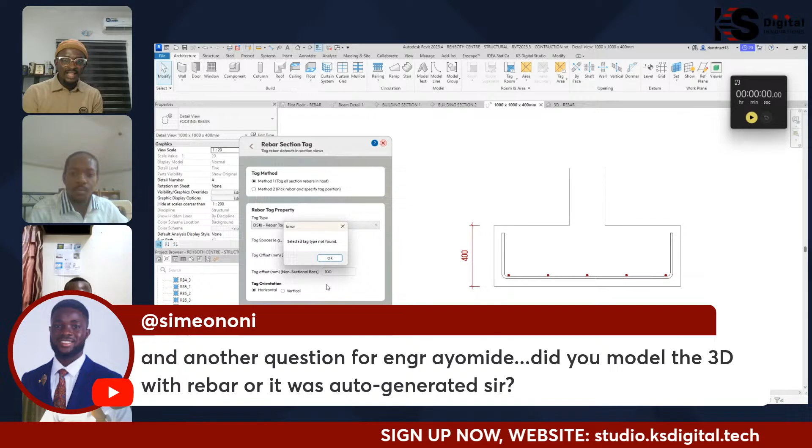And that brings us to challenge KS Digital Innovations. It would be very nice if we have a plugin that can do this for us. We're challenging you. All right. We want to promise our entire audience, our users and potential users, that this is what we are actively working on right now. Not just to place your rebars, we are also working on how you can design directly inside of Revit. You design your beams, your columns and your slabs, your walls, all your structural elements, directly inside of Revit, and then it will create the rebars for you as well.

Naturally we have issues with interoperability. You move the model in Revit to another software like Prota or Robot or Tekla, and you have to come back and model your rebars again and do your construction documentation and so on. That's too much work. So we are trying to bring everything into Revit, so your entire workflow will be in one platform.

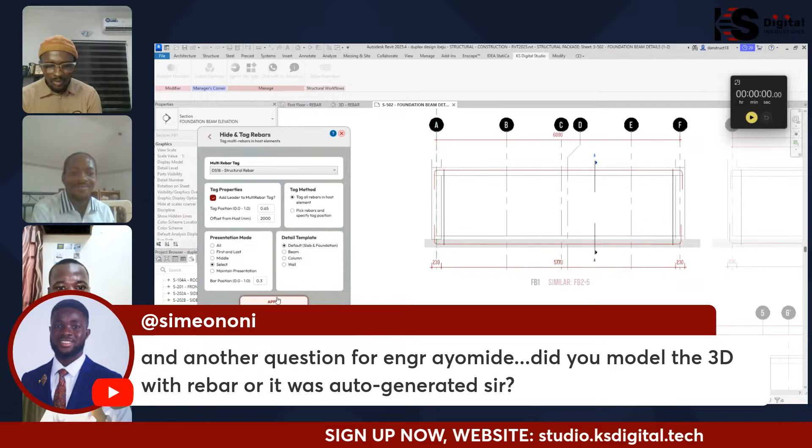So yes, it's coming soon. We are promising it's coming soon, before the beginning of February. Hopefully, we are working towards that. It's what keeps us awake at night, because we know this is one of the needs that everybody is clamoring for. So thank you very much, Simeon.

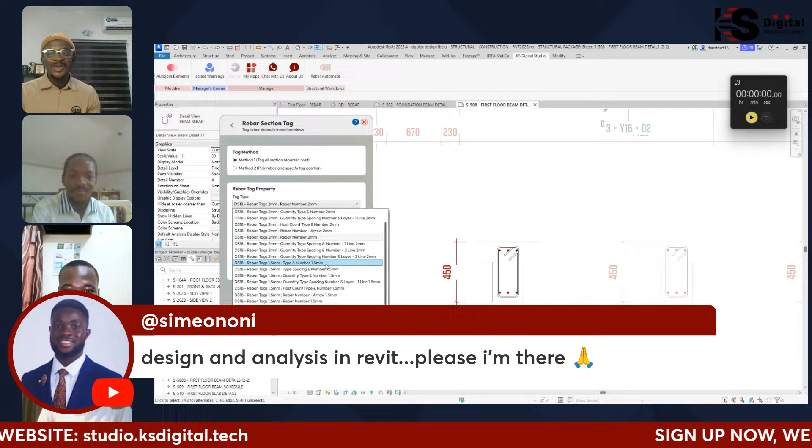I think we have a question here from Mr. Simeon. He's really following us. Thank you. I think we have to spotlight him on our platforms. He said design and analysis in Revit, I'm there. I think it's everybody's pain point. Everybody's crying about it. But let's quickly take this question.

Pius, what would a plain project tag look like for me coming to Revit for detailing? Okay. First of all, all these tags are because this is Danstruct 18's platform. This is their template, that's why you're seeing it specifically. But Engineer Ayo, can you show your normal default tags for your rebars in Revit? Do you still have them? Because Charles Uni asked just now how the Revit tags will look when you enter Revit.

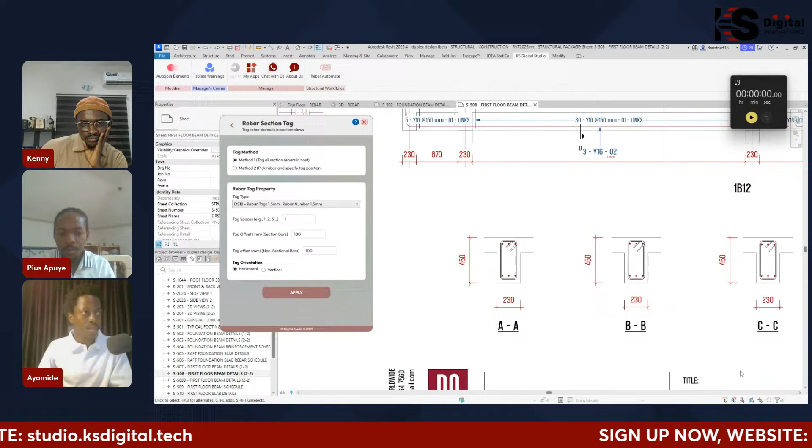Okay, maybe his network is transitioning, like you said before.

But to answer that question, usually there are standard Revit templates when you are going into Revit. Let me spotlight the question again so that everyone can see it. The standard Revit templates, when you open a new project in Revit, you see standard templates, structural templates. You create your project with that template, and so usually there are template tags, annotation tags inside of Revit that you can modify to suit what you want. Then you create your own templates out of them.

Maybe you modify the existing templates inside of Revit, out of the box tools and tags and what have you. Just like your sheets, just like your title blocks. You have tags as well inside of Revit when you open a new Revit project. But then it's left to you to decide if you want to modify it, if you want to edit it, change the colors like you see with Ayomide's projects. And you can do it yourself.

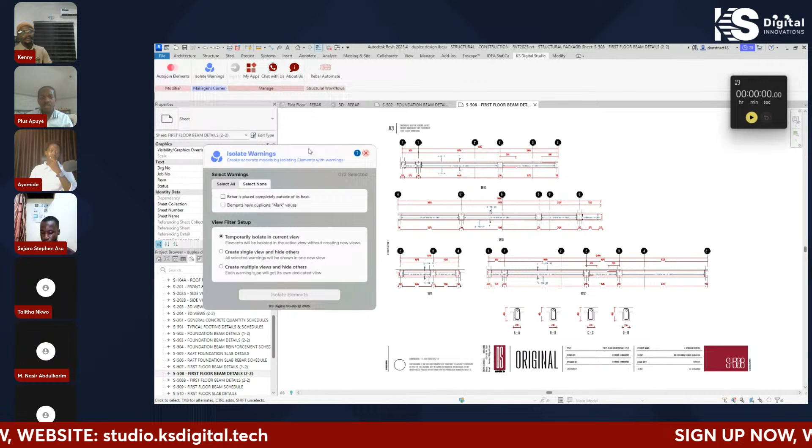So for this specific isolate element, I think it fits the role of a BIM manager. It allows you to specifically isolate elements. This is very important, let's say you're using Revit as your tool, in that situation where you're going to have some errors when you're modeling. And correct me if I'm wrong, my BIM people, you have to have all your models to be very accurate. You don't need errors, because you're going to be flying into a lot of things if you want to do your schedules. I think all these BIM people call it model health.

Yeah. Exactly. Thank you. These warnings. Okay. Yes, so it's always good, it's a good practice. Even down in the plugin, you can see under there it says manager's corner. Very little detail, but I like that. It's a different color. That's for our BIM people here. Now, going to the isolate warnings, it will show you all the warnings related to that project.

One thing I've noticed on Revit, if you're a heavy user, is that sometimes when you model something, I don't know if you've experienced this, Stephen and Nas, you model a rebar or something, and it tells you the rebar is not in the host, and tells you to show the view. Definitely. It tells you a good view cannot be found. You will not even find it again. So what this helps you to do is to specifically create views for that. When you open it, it already shows you the errors that are already there.

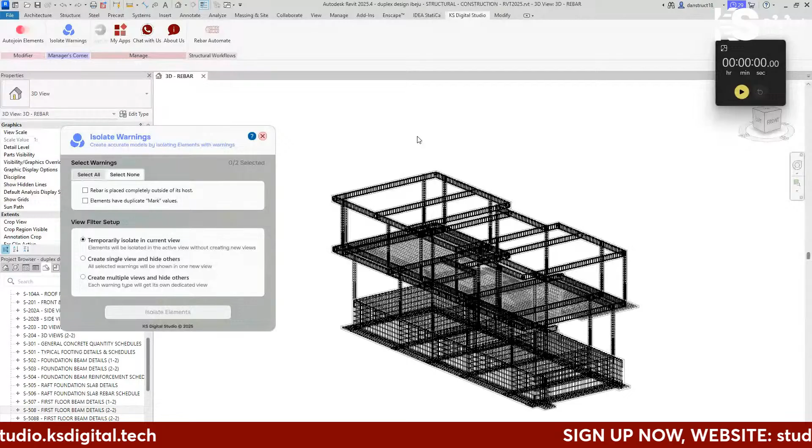This is very, very important. There was a project I worked on where I had to use the quantity of rebar to give to the QS and to the main architect, so they could measure the progress of how much reinforcement the contractors were getting, whether it's above or below. Now imagine you get an error that says rebars have been placed twice; it's going to count as double. Let's say on that project it was 144 tons. Now it's times 2, so when I extract that value it shows me 288 tons. This is why you need to pay attention to your BIM.

That's actually a very dangerous thing in BIM. Exactly. So this tool helps you to identify those errors. In this current project, the first one is rebar is placed completely outside of its host, and the second one is elements have duplicate mark values. You can now be the expert to say, is this something I can ignore, or something I need to look into? For duplicate mark values, as an experienced Revit guy, maybe I was naming foundations, like pad footings with different types, and wanted to use mark. Sorry, I'm geeking out here. It helps you to gauge the errors you currently have.

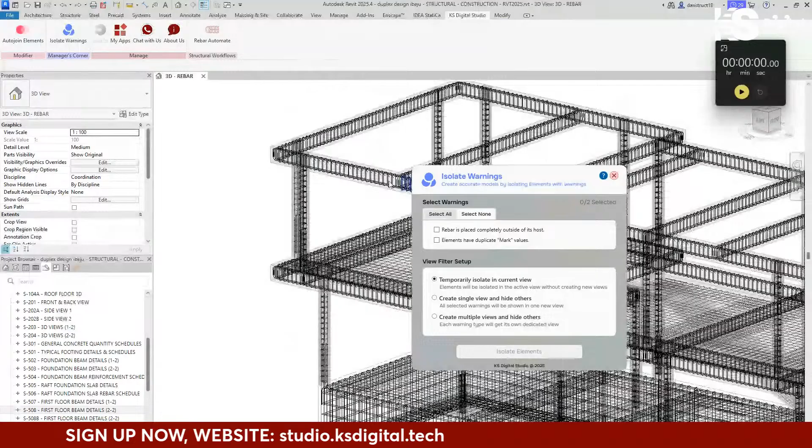But now let me go to the main topic, the view filter setup. In the first one, you see temporarily isolate in current view. So if you click on rebar is placed completely outside of its host, the first warning, it shows temporarily isolate in current view. Sorry, can I cut you off here? So these warnings are the categories of warnings that are all in the project right now? Yes, every single one.

Okay. Permit me, let me try one thing here. I want to have a duplicate rebar in place, to see if it comes up. So let me just try and do this. So we have identical rebar in. Okay.

Okay, I think this is a very nice observation. What we can do is to create an updater that will help us update the warnings on the UI. But what we have currently is that you have to close it and open it back, and then it will show it. So if you close the isolate warnings UI and open it back, I think. Thank you for raising that up. We are going to fix that on our end.

Yes. I think the goal of this stream was also to show and also try and identify some of the things that we can also work on. Because I love this platform where we can give real-time feedback to the creators to make it better. So that's one of the reasons I'm also here too.

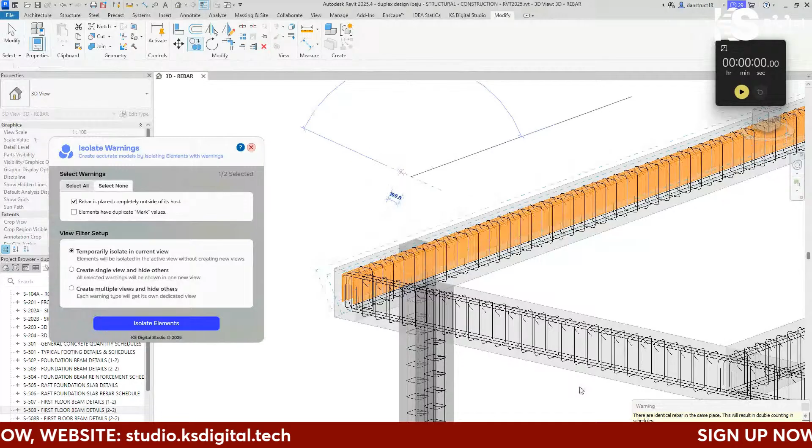Yes. I have seen a lot of things this evening. And wow, like just wow. I actually believe this is also a wake-up call for professional structural engineers in this whole design area to start adopting this whole thing before they get left behind, because you will get left behind if you slack, honestly. Mr. Kenny, well done. Thank you. This is really, really amazing, I can't lie. Thank you very much. Our team is saying thank you as well.

Thank you. So, Pius, I just wanted to hear from Talitha too, and also Damteck that is also with us. So Talitha, what do you think about it so far? Because I've just been observing, and technology when it comes to our industry, I'm always happy to see. Usually we try to adopt from the Western world, and seeing that we're creating solutions tailored towards us, more affordable, like you said, it's really remarkable. When you were doing the detailing, I was just smiling in the background. I'm like, wow, this is really easy. This is very efficient. So this is a good job. This is well done. I'm really impressed, and I hope this lasts on the long run, to be honest. Yes.

By the grace of God. And then Damteck, we've not heard from Damteck. Yeah. Good evening. Can you hear me now? Yes, we can hear you.

Yes. This is actually great, and I'm very happy that we are here now. Because one of the issues we've always been having with Revit is always the stress of detailing. Like you said, people run away from it, and here we are, Kenny making it accessible, even very cheap for everybody to actually use, and we are paying in naira. That's very important. So no issue of exchange rate and anything again. I'm very, very happy because of that, 'cause this has been in the works for probably about 4 years or so. I'm just very, very happy that Kenny is now here. Chief, I hail you. So thank you very much. Thank you very much. Thank you so much.

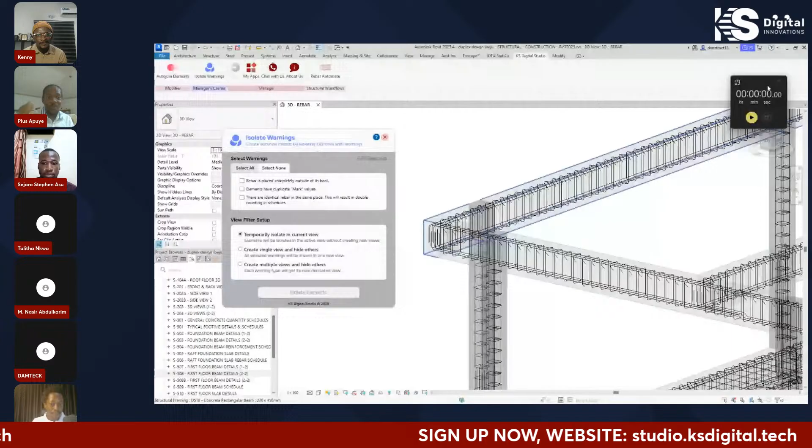So with this, something just popped in my head. Maybe this is going to require a lot of information, but maybe this is a challenge I can throw to KS Digital Innovation. For each of the errors, we have a level of priority. Identical rebars in the same place should be shouting red, as in priority one. If it is placed outside of its host, we can put yellow. That's something that came to my mind now. But let me get back to it.

So let's try rebar is placed completely outside of host. You can just tick the first option. Okay. I just go ahead and tick the first one in here. So what the first one does, under view filter setup, it says temporarily isolate in current view, so in this current view you are in, it's going to temporarily isolate it. So if you click on isolate,

yeah, no, don't worry about that. I just have to reopen Revit. I think it's because of the amount of processes that we have going on. No problem. Please also share your screen as you open, so that as you begin loading your Revit, you see the KS Digital Innovation module also load up, so that you will not be scared that someone hacked the laptop.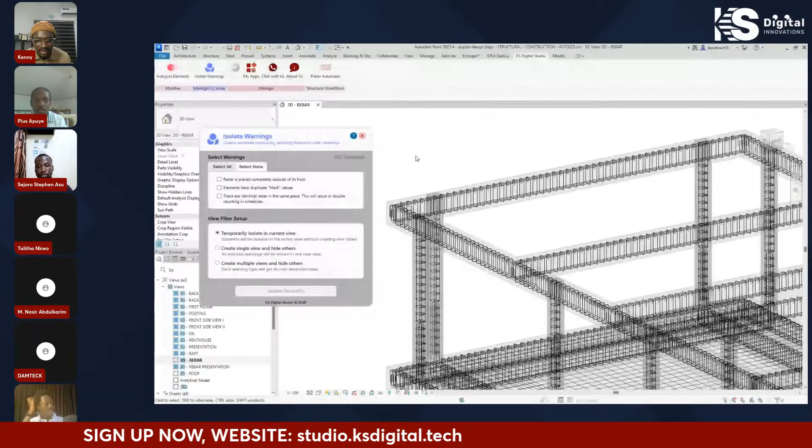All right, so rebar is placed completely outside of its host, then temporary isolating current view. Okay, so isolate elements. So to check it out, just click on isolate elements. So now you can see the specific ones. You can do that for each of them, so you can monitor them. This one is complete outside host.

I want you to do that specifically for the third option. Well, let me try something. This is good because I can easily just quickly correct them, so I can have two views where one is isolated, right? And I can easily fix them, because everything in Revit is connected. I can select this one, for instance, come here, and then quickly just correct it like that, right?

Oh, this is going to be very, very, very good. I see how useful this is. All right, let me just come back here.

Then the second option is the create single view, which is very important. Like, let's say you want to create a separate view, you want to do that later, or you want to analyze it better than this. So you can have this create a single view, and then you'll see the option that says view naming setup, so you can put a prefix and a suffix. And the cool thing about this is that it actually puts it in real time, so as you're typing it, you see the preview of what the name is going to be. So for the prefix, you can type error.

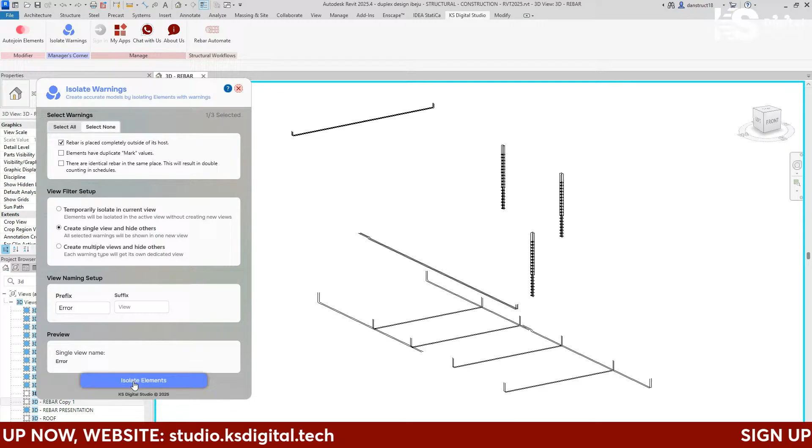What just happened? It creates a separate view for you. So the other one, it just isolated the view temporarily. This one, it creates a separate view, it creates a new 3D view. While this one, the first one, still maintains the original view. Okay, so if I just... okay, so it falls here.

I see, interesting. Now check that the name means as well. I just did that yeah, what I just did now where I had to duplicate, that means I don't need to do that then. I can just use this option, then I can just come to the view and I can just tile the views. That's exactly what we do as well. Oh, that is going to be useful. I didn't even think of that.

Wow, exactly. Okay, then lastly, we have the create multiple views and hide others. This one is going to be, let's say you have a lot of warnings and you want to check them individually, you want to create the view. So you can select, or you can just see the one that, first of all, from the top, it shows select all.

Select all, here at the top. So you just select all, then choose the create multiple views and hide others. So you can put prefix error, then you can see how it's going to name it.

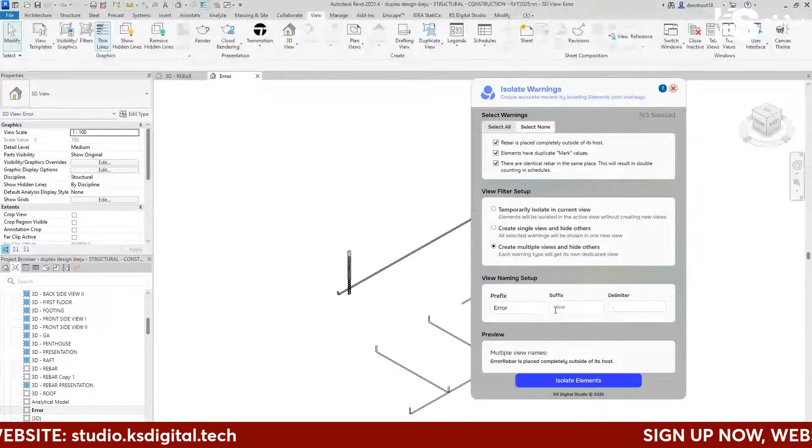So you can put a space bar after the error, in the prefix. Okay, so now you can see it's going to create these 3 views for each of these warnings, so you can work on them individually. So if I click on isolate elements now, what's going to happen? I just do that, right?

What about this delimiter and the suffix? Okay, so the suffix, you can type it out. So in the suffix, it's going to be after, just like what suffix means in the English language. After, just the name.

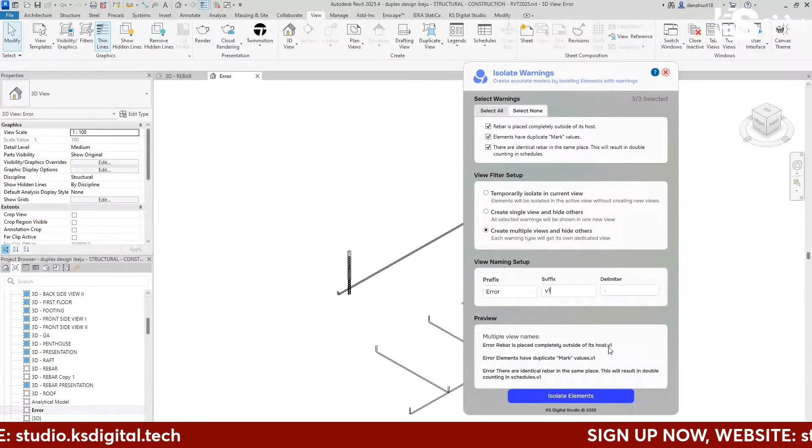Let's say version 1, V1, and then it comes after it, right? The delimiter separates it, so you could use something like a comma or a full stop. It's not necessary actually, it just depends on how you want your naming to be. Once you click on isolate elements, it now creates each of the views there.

I see them here in the project browser. So you have errors elements, and you can now look at them individually. So these are for duplicate marks, these are for rebars outside their hosts, and these are for elements with issues.

Makes sense, and their names are so I can now compare them with the- Yeah, can you hear me? Yeah, I can.

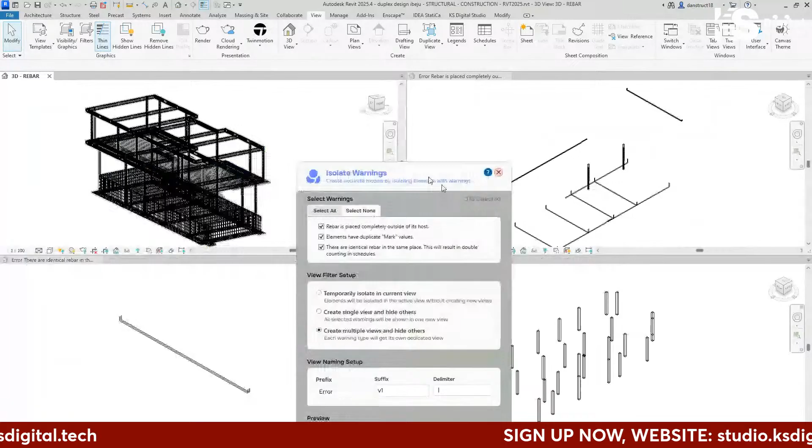For my BIM coordinators in the house, I'm not really deep inside BIM work, but you guys understand this more. Let's say as a BIM coordinator or manager, you want to show the modeling team some of the errors you encountered while coordinating. So you can use this to create separate views for the meetings, and then show them that during the coordination meeting, for the architects, these are the views we noted for the model and all of those things. Something I thought about that is going to be useful.

Interesting, this is interesting. So you can just kill multiple birds with one stone. That's why I love how it calls it the manager's corner.

Because of time, we won't really be able to look at auto join, but we have the video available also, and it's pretty self-explanatory. That's like the most self-explanatory tool I've ever seen, but there's also a video.

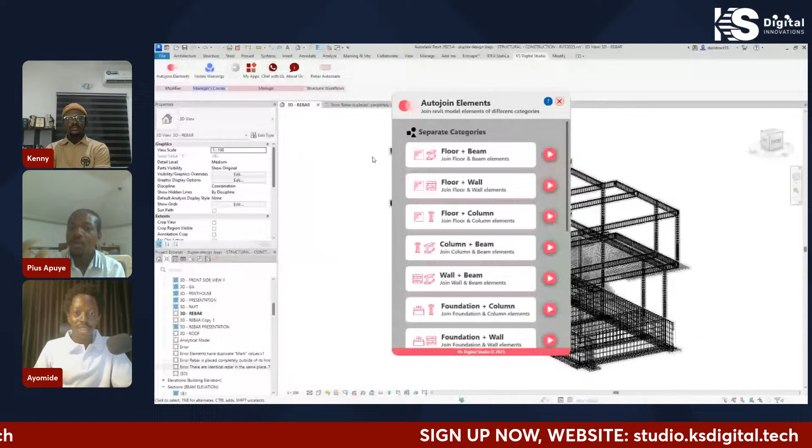Okay, here, login. All right, so it's pretty self-explanatory: floor to beam, floor to wall, floor to column. There's also, if you see under the same category, beam to beam, column to column, foundation to foundation, wall to wall.

I think this would be very useful, especially when you have 2 elements that have different materials. Sometimes Autodesk Revit doesn't automatically merge them together, so you can just quickly use any of this. Even some elements with the same materials don't join automatically, like columns and foundations. I don't know why, so this would be very useful actually.

Imagine how much time it would take to manually do it, using the join tool and joining one element to the other, one after the other, for a 5-story building. Imagine how frustrated you would be, it's crazy. This will really help you achieve that by doing it for the entire project at once.

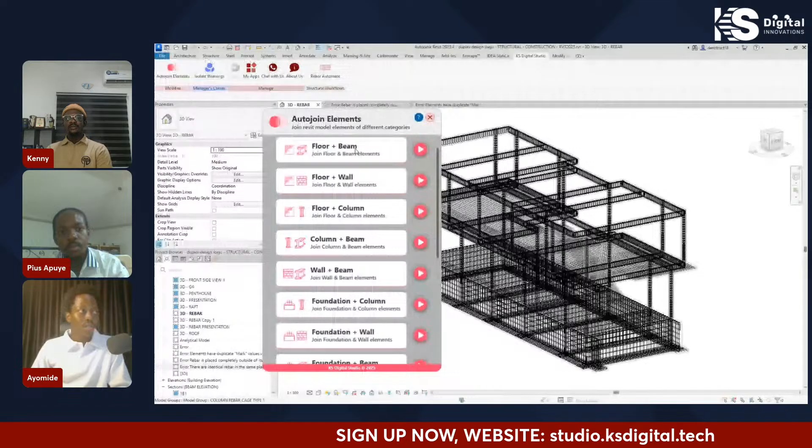And I think there's a button that leads you to the videos as well, I think the help button. So you can actually link to a help video. Okay, I see, all right, awesome. Wow, I've been really blown away by all these tools, and I understand there's more to come.

The last remark I'll make is that because tools like this are coming up, it's very important to also pick up your game with learning the core fundamentals of Revit. It should encourage you to also learn how to create templates, and help you understand some of these things we're talking about in the host. So now it's going to be very challenging.

The key thing here is that Digital Innovations is trying to reduce the time it takes you to actually work on the project. It's meant to make it easier for you. As a structural engineer, a fully designed house takes me a week. In the future we're talking about doing this within a day, accurately, to the same standard that used to take a week. I don't know about you, but I want that so I can go and play.

Yeah, they are very correct. Quickly, let's actually answer Simeon's question. Can you quickly answer it, because otherwise he won't come meet us. Okay, all right, let's skip to the question on BIM adoption. What question was that again? Okay, the question about how we can adopt BIM in Nigeria, let me bring it up. Yes, can I answer that? How can we adopt BIM in Nigeria? Yes, okay, answer that.

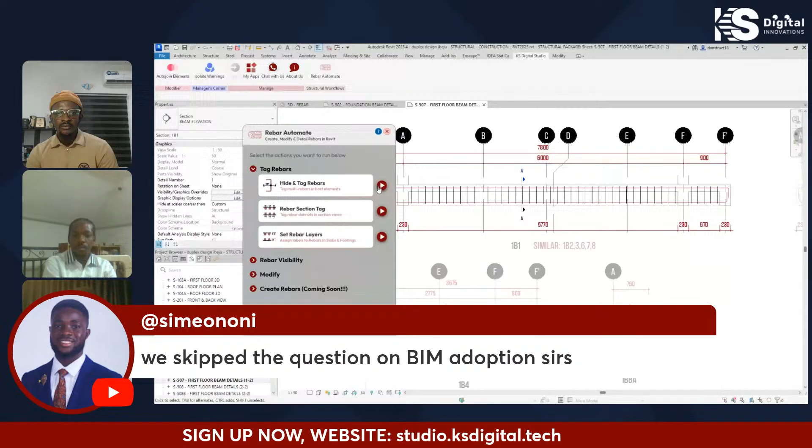The first thing we need to know is that BIM is already being adopted in Nigeria, but not as much as we want it to be. I must also clarify that it seems like most people feel BIM has been adopted worldwide, but it's still kind of a fast-growing technology. For instance, I read an article where even in some first world countries, BIM is not really moving as fast as it's meant to, because people are comfortable with the tools already made available. So it's being adopted in Nigeria, but not moving as fast compared to other countries.

What we can actually do, especially as professionals, is keep pushing tools out like this. We've become so comfortable with some of the tools, such as CAD, doing things the old way, and most people will just prefer to do it the way they do it. I think that's our biggest problem in the Nigerian market. I don't know if it's the same in other African markets, but I think that's our biggest problem. If we can continue pushing out tutorials, videos like this, and awareness especially, we'll be able to solve this.

Look at this right now - I believe the reason majority of people haven't been using Revit is because of the technical know-how, especially for structures or systems design. But with tools like this, it's quite encouraging. What you were meant to do in 20 hours - I'm not exaggerating, you guys have seen it - you can actually do in like 7 or 5 hours. So we just keep pushing the awareness and making content available. I believe we'll actually get to the point where we can.

I would like to contribute to that. Can you hear me? Yeah, all right, so you're speaking from that. That is a very valid point - it's from the cultural perspective, also from the finance perspective. Most of the products, BIM is driven by engines.

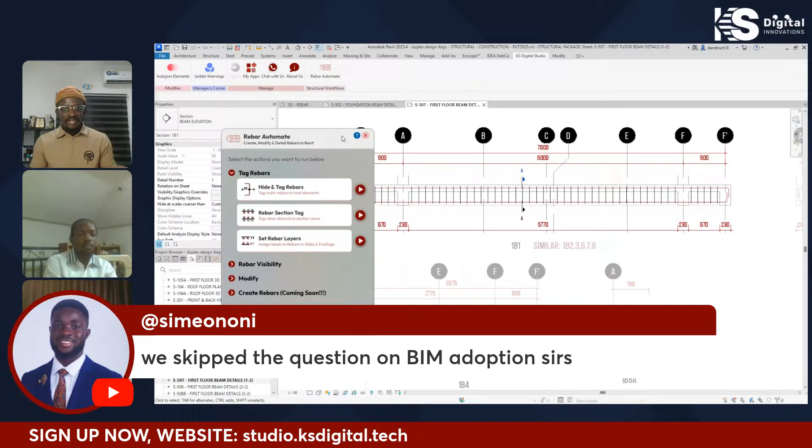When I say there are engines - a car cannot move without an engine, you get? So the engine of BIM basically are the tools that enable you to adopt BIM. For example, Revit is a BIM tool - it's not BIM itself, it's a BIM tool that helps you drive the BIM process. There are many other tools like that - Solibri, Navisworks, the Autodesk tools that implement BIM.

These tools are pretty expensive if you bring it down to the context of the African market and our economic reality. It is really expensive, and many of us cannot afford it. Me, I cannot afford it - at my current financial status, I can't afford most of the tools. Imagine, Autodesk just mentioned they'll be raising the pricing of their software by 15 to 20% in 2026. Currently it's about $2,500 to get the AEC collection or even get Revit alone. I know how much that is in different currencies - many of us can't afford it. That's why BIM adoption can be very crazy, almost very impossible, because we don't have the money or resources to pay for these tools.

So that's why we decided within ourselves, KS Digital Innovation as a company, we are looking at how we can create our own tools for ourselves and make it affordable. We've started, as you can see, every one of our plugins here, they are less than $1. If you check it on a monthly basis, less than $1, and we even give up to a 90% discount.

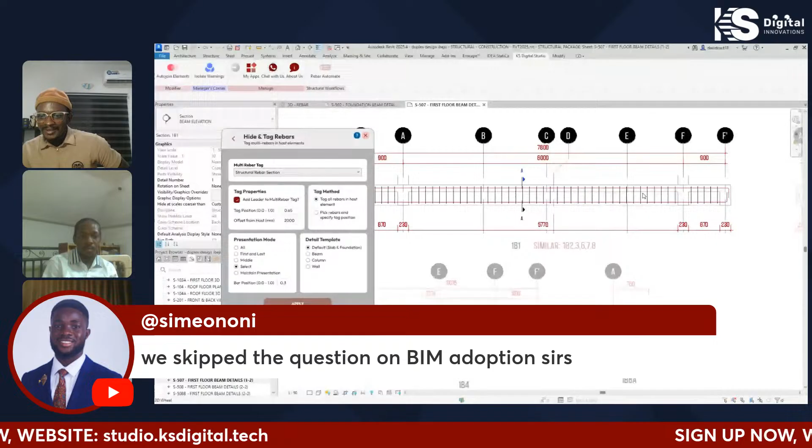Yeah, and if I can also add something as well, because we talked about it. This is a contribution from someone. Okay. Yeah, can I quickly add to that?

So Autodesk, the company, also offers licenses for students and educators as well, and it's something that the majority of us in this part of the world are not aware of. In collaboration with KS Digital Innovations, Downstroke 18, and Greg's Studio Design, we'll probably hold a webinar in the near future on how to sign up and get access to these tools. So while still students, educators or even young professionals, you actually have access to use these tools. Yes, there are free licenses for educators and students. So please stay tuned for that webinar coming up soon.

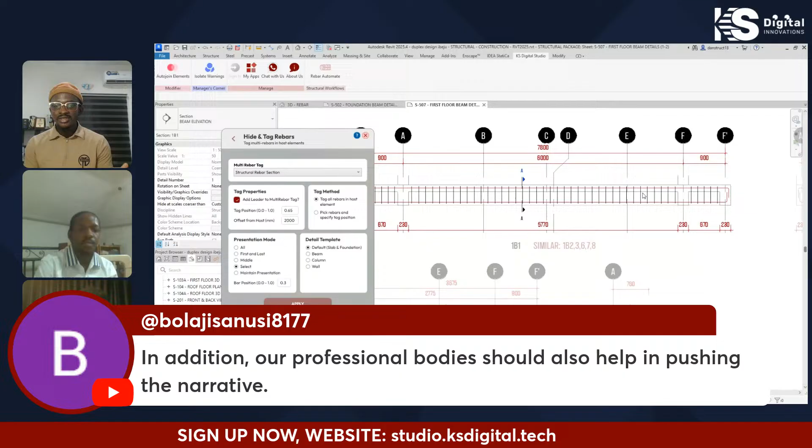So now this contribution from Bolaji Sanusi said, in addition, our professional bodies should also help in pushing the narrative. That's correct. This is something that is beyond our control as individuals, but we can drive this in gatherings where you have professional bodies and the movers of professional bodies in Nigeria or in Africa. But it also needs to be addressed by these associations before we can actually see real adoption. Because, for example, if COREN, NSE and NIA, the Institute of Architects, push the adoption of BIM as policies and the government backs it, everybody within the industry will adopt BIM. So their involvement is important. Exactly. Thank you very much for the contribution.

I think we have a contribution from Damteck here. I think he wants to mention something on adoption. That's my friend Dami. You want to say something about that? Yeah, Damteck. All right, please say something.

So about the adoption of BIM in Nigeria and Africa at large, the major constraint is actually the government policy. No matter what we are doing, if the government is not doing one or two things, it looks like nothing is moving, but a lot is actually moving. For example, in Norway, when they wanted to start their adoption, they started from 10-story buildings. If you are building anything above a 10-story building, it is compulsory, not negotiable. You have to adopt BIM, and they started from government projects. If government is not doing it, others are not going to do it.

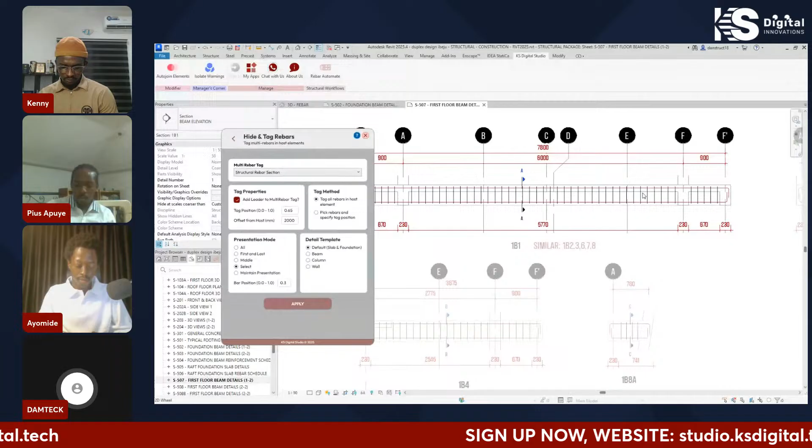As of today in Dubai, even if you are doing a 1-story building and you are submitting your documents, it is a must to submit your BIM execution plan along with it. It is not negotiable because there is a government policy that backs it up. So coming down to Africa in general, North Africa seems to be far ahead of us in the West here. South Africa is also there. They have some BIM policy in place.

So coming back to Nigeria, we've tried and talked to the stakeholders. The stakeholders look like they are going to do one or two things, but we all know what Nigeria is all about. So when it comes to BIM adoption, the major constraint is the government. Yeah, Kenny said finance.

Yeah, finance is one major part of it also, but the government policy is just like at a time in Lagos State, when you are submitting your approval drawing, they ask you to submit a soft copy, put it in a flash drive or a disk, and submit to them. Everybody follows suit. Nobody was saying, "Oh, I'm not going to do it." So government just needs to come, especially now we are having a lot of high-rise buildings coming up in Eko Atlantic, Ikoyi, Lekki.

Government just needs to come and tell you that, if you are building 15 to 20 floors and above, you have to submit a BIM execution plan on how you want to go about this project, because we are looking at sustainability. We are looking at the future. We are looking at a digital twin. So when there is an issue, we can easily find our way around it.